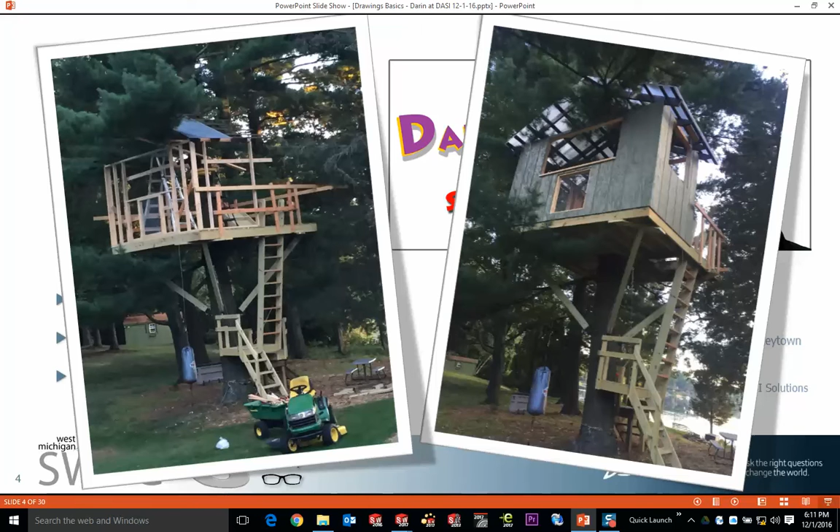I've got a lot of accolades over the years. Lately, I've been called a treehouse master. Spent the last 2 months building this thing. Now, that's a 12 by 12 treehouse. It's 15 feet in the air. It's got all the nice brackets and things that you see on the shows if you've ever watched some of those things. Enough support to put about 22,000 pounds of wood in the air if I needed to, which is way over designed.

But in my real life, everything I do starts in SolidWorks. So I've done multiple decks and remodels and garages and basements and bathrooms and a couple of things here. But this is using weldments functionality, so not what we're talking about today. But when I get a chance to vet something out, form, fit, and function is always tested in the CAD system. Doesn't matter what it is. I'll build it up real quick. I'll get the framework, if nothing else, and use the CAD system and trust it very much. So do that kind of stuff as you move forward. It's a good reason to have stick time and to be able to use the software.

So does anybody recognize these kind of things? These are napkin sketches. This is the poster child for an idea that came up when you least expect it. Now, napkin sketches are generally how we try to convey things. Anybody has not had drafting in high school, college, junior high, anywhere? You all had drafting. Did you do any drafting board work?

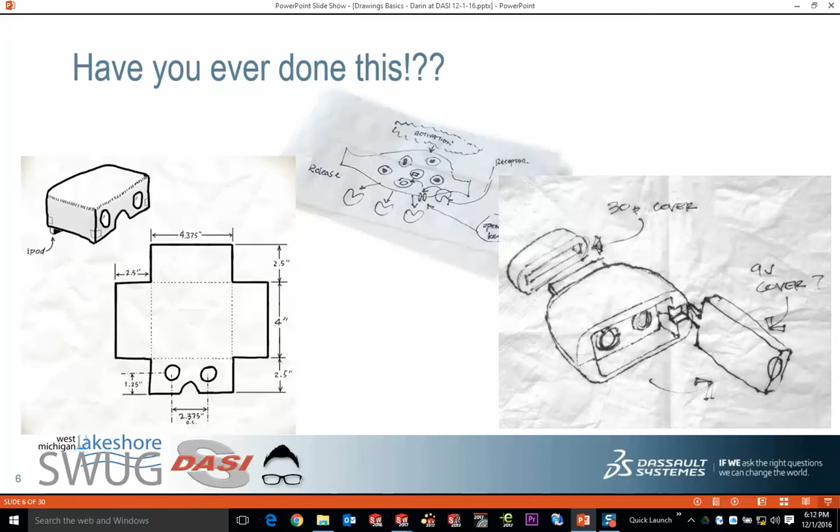College? Okay. I'm glad that they still teach you, because if you don't know the concepts, you don't know how to do these things. First of all, you won't appreciate how the updates in the CAD system work when you don't have to redraw from scratch. You still have to know the basics of how projected views work, what annotations are proper, how GD&T works, and even that's getting a little bit higher with a lot of what people do these days.

This is what we're trying to produce. That's what SolidWorks is capable of, is the wheelhouse of the software. You make your parts and assemblies, drop them onto a drawing. The drawing virtually makes itself. Now, a lot of people think that this is a lot of work. So hopefully, for those of you who are somewhat new to the software, I'll give you the basic workflow that you would use to go ahead and create drawings.

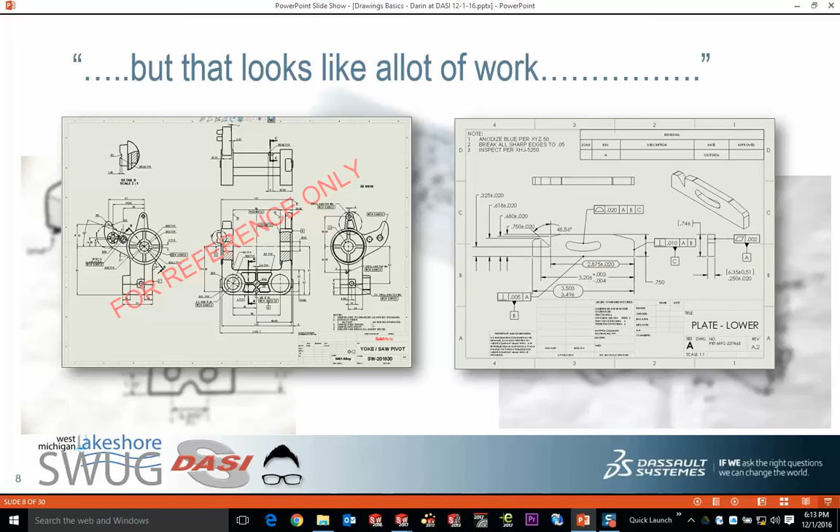And basically the stuff that no matter who you are, you should be able to create and put on your drawings. So we're going to break this up into 5 little segments here. Everything we do starts with a 3D part. So no matter what it is, the geometry is what drives your drawing.

Now, if you want to do 2D drawing or drafting in SolidWorks, sure, you could do that, but it's definitely not the tool of choice for things like that. Once your parts and assemblies are there, which we'll cover in a later step, the drawing views virtually make themselves.

Now, I always have a fear of showing presentations like this because I feel like everything I'm going to show you is something everybody knows. But honestly, when I get a chance to watch somebody present, whether it's the surfacing that Sean's doing over there with admin or up in the top there, I always learn something, no matter what it is or who's showing the product. So there's always a chance to learn something.

Once we do our drawing views, you have to annotate them. Got to have your dimensions. Sometimes we'll have GD&T depending on what level you need to communicate with the user. And then of course, assemblies and parts are both used for this. But when we talk about assemblies, now we're talking bill of materials, ballooning, those kinds of basic things. So we'll cover that a little bit as well.

And then in the end, change assimilation is a really huge part of our software. The only thing constant, frankly, about design is change. When you're making something, the only virtual certainty is that it will have a change at some point, most likely dozens. So we want to show you how the change update takes place and just give you the confidence, if you're not really adept with SolidWorks, to understand the files and how they actually talk to each other and the updates roll through. So these are the things we're going to try and hit today.

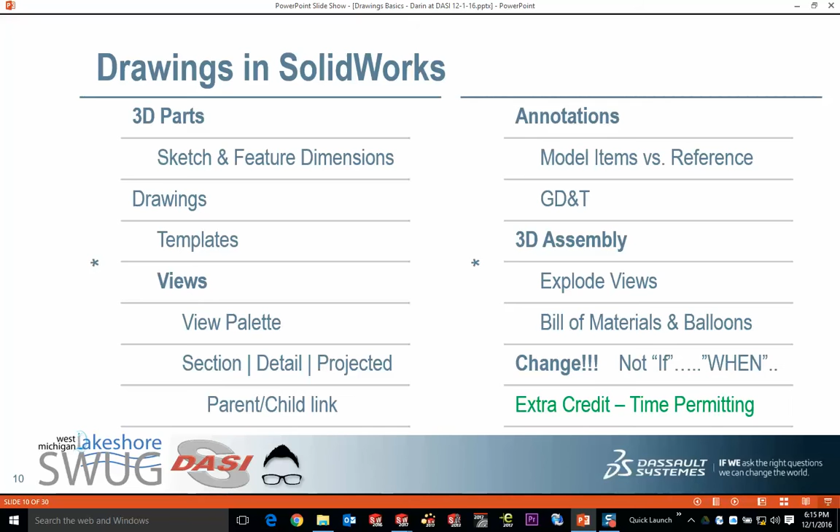So some of these will take just a couple of minutes, others we'll expound upon. And if we get to the end of this data here, I got a few other things just to fill the time, but we'll see how we are with questions and answers. But it all starts with creating the parts. So we're going to make parts. I'm not going to show you that part of it, but I will show you what we're starting with, and then we'll get right into the drawing creation stuff. So let's get started with a 3D part.

So kind of an awkward question, I guess. Anybody not made a 3D part yet? Okay, I'm glad. A couple haven't. So you'll be a little new to the software at this point, but we'll kind of go past this just a little bit as we go. But here we are in SolidWorks 2017.

Now, when you're talking about 3D parts, the basics is that you're starting files like you would in a word processor, you're opening up a document, and then you're creating geometry. And on that geometry, you're going to draw shapes. So sketches with circles, lines, arcs, polygons, whatever that might be.

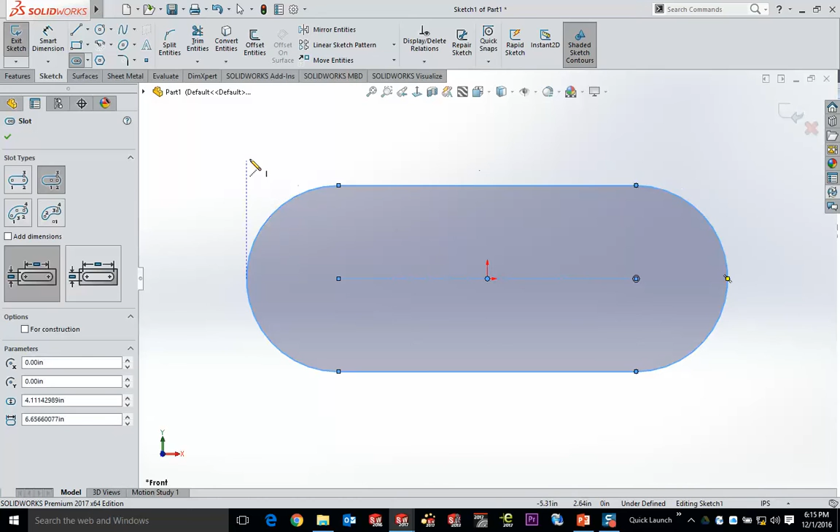When you draw these shapes, they're just basic sketches, but those sketches have dimensions. So as we go ahead and start putting dimensions on edges, whatever you type in as the value is what that's going to update to. So it's a very easy thing. But these are the dimensions that are generally drawn upon when we're making 2D drawings. So I've got a couple of sketch dimensions, we hit extrude, and bam, there you go, you've got a solid.

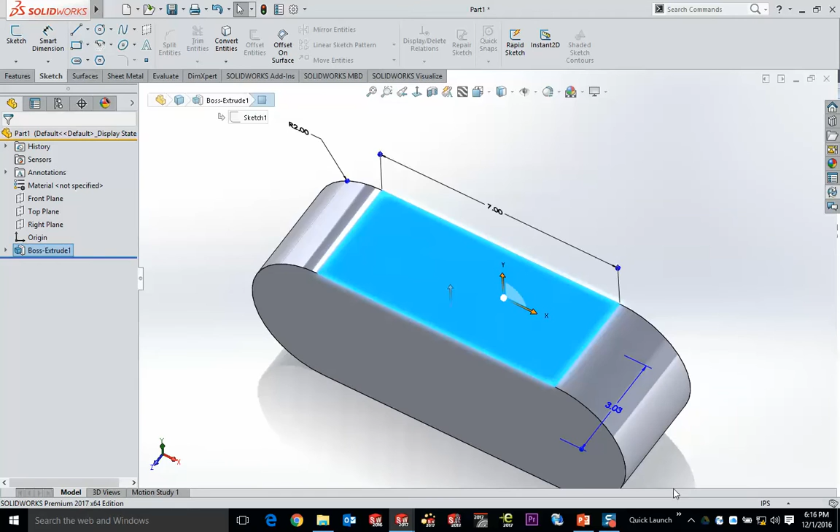Now the dimensions that are used for sketches and features, here's the 2D sketches in black. Any extrude or other feature dimensions like draft and other things are going to show up as blue. And that's really the color coding that we use at this level of things. But as you start to build, what you end up with is a bigger picture of what this part's going to look like.

Now I'm going to roll back in SolidWorks, something you might not be used to over here, but there's this tiny bar at the bottom of your feature tree. And you can roll back and step through feature by feature to see exactly how this part was built. So I can see that we had a cut, we've added some fillets to the inside of the cut, there's a little chamfer around those edges, and then a boss added to the bottom. A little shaft undercut on that, got a little revolve at the bottom that's going to give us a snap ring groove there.

And then we've got a couple of other features there to tidy this thing up. But every one of those steps has feature dimensions available to it. Now, one of the things about these dimensions is that generally, on a part like this, I could probably get away with it pretty easily. But a lot of times these dimensions aren't the types of dimensions that you'd use in a 2D drawing. They are there for feature change.

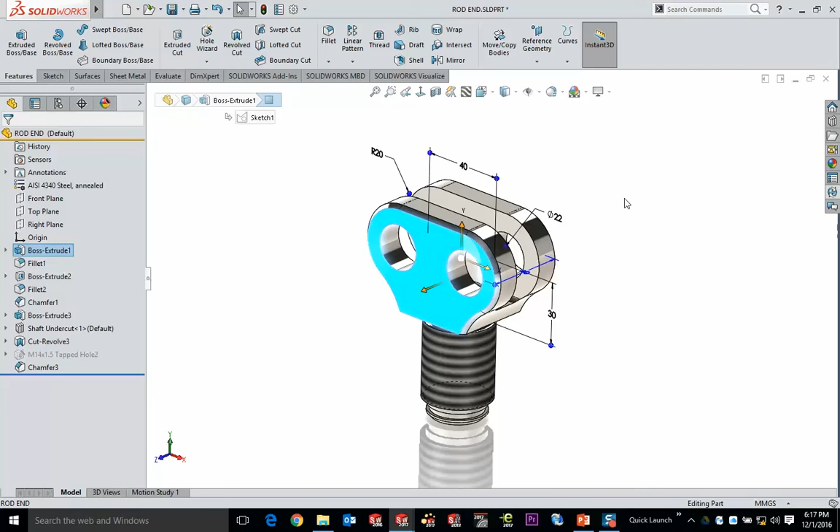They are there for predictable and controllable parametrics, which means as you change something, your design intent is going to drive how it updates. So generally, because features are built sort of on an island, they give you a bigger picture here. But when it comes down to it, what we're really talking about is individual features here and there. So one feature here is dimensioned as if nothing else exists, and then other things get added to it. And in some cases, that design intent will work, and in other cases, again, it is just to control the design intent of that feature.

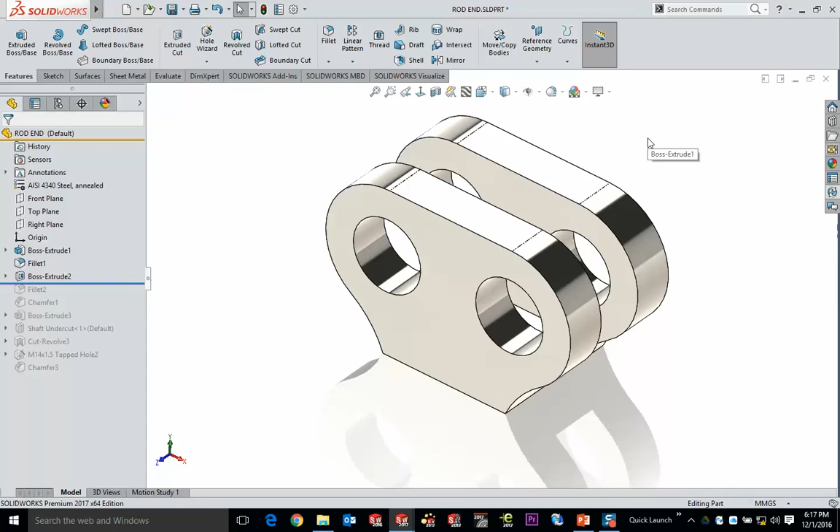So as we start with a part file here, this is really the underpinnings of making a drawing. So to do that, we're just going to make a brand new file. Now, in a Windows product here, you'd look for the little white dog-eared piece of paper. Think of Microsoft Office, Word, Excel, whatever you want to do there. But underneath this pull-down, there's two different choices here. You can either say you want a new file, which will generally choose either part, assembly, or drawing. This is just opening up a blank file regardless of how you cover that.

When you have a document open, part or assembly, when you hit that new file pull-down, you're going to also see make drawing from part or assembly. And that's really the workflow that you want to do there. What this will do is not only start a new drawing, but it will also automatically populate the view palette with the document that we see here currently.

Now, one of the things you might see here is that I've got a bunch of different tabs. These tabs are folders on your network, in my case, folders on my hard drive, but they contain drawing templates. Now, I've got a lot of different ones here. Generally, they're different sizes. Some of them I've created wide format, so C size height, but 3 to 4 times the width. Each of these is a starting point that has preset things like standards, font heights, dimensional tolerances, other things that I might not want to have to set every single time I make a new document. When you just have an initial installation of SolidWorks, you generally don't have a trove of these built up yet, so you'll just have this one tab called Templates.

Now, using this is going to give you an opportunity to use what SolidWorks provides. SolidWorks provides every ANSI and ISO size drawing template that you can imagine. So you're going to have your A, B, C, D, and E sizes for ANSI, but then you get the European sizes of A0, 1, 2, 3, and 4. Each of those is available because we're sold in 85 countries and 14 languages. So we're pretty much covering every geography out there.

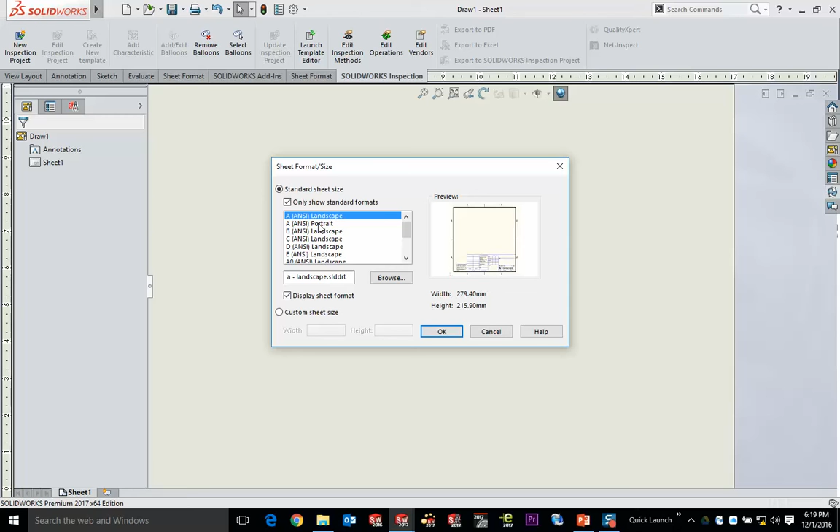When you start one of these, say we'll grab a C-size landscape. This is a generic file that you'll get from SolidWorks. It has a title block, so down here in the corner, you're going to have some details of text. There's also some preset properties down there as well. So if I click off of this for a second, what you'll notice right down there is that I've got a name that's already appeared here. There's a scale value, there's a sheet number. These are associative things that are actually going to change dynamically.

Now, keep an eye on that in just a second here, and I'm going to go ahead and start making drawing views. Whenever you start a brand new drawing, whether you're a seasoned user or a novice, this thing called the view palette is actually quite helpful. And just so we don't get all kinds of things flying around here, let me just pin that in place so all my windows sit nice and stationary. What it does is it shows you all the standard views available. Now, in the United States, generally you're going to do third angle projection, but if you're dealing with European clients or customers, first angle is something you can also set these to. You do not want to set it to first angle and then make parts here.

We've had companies that accidentally install it with an ISO installation instead of an ANSI installation, and they end up making parts that are completely mirrored of what they're supposed to be because of projection rules. So generally, if you install it in a United States computer, you're going to get a third angle projection.

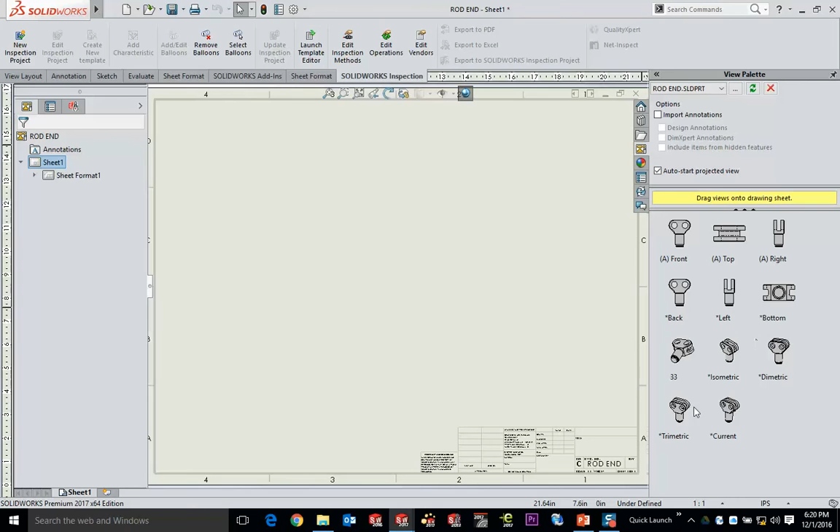One of the things I like to do, though, is make sure that this button is checked. Now, it's not necessarily checked by default on a new installation, but once you check it, it stays persistent. And it's called Auto Start Projected View. When you're given all these different views to choose from, including some other named and other positional views that are there, you really just want to grab a view and drag it out to the location you'd like it to be placed.

So with Auto Start Projected View selected, once you drop this first view in place, it's going to automatically project just based on where your cursor is. It's essentially throwing a top, right, a front, or an isometric view depending on where that cursor is. But the key here is that you just want to click where the view happens to be. So I'm going to click over to the right. I'm going to also click a bottom view here. And I'm also going to go up and to the right here for an isometric view. But I don't want the view up there clearly.

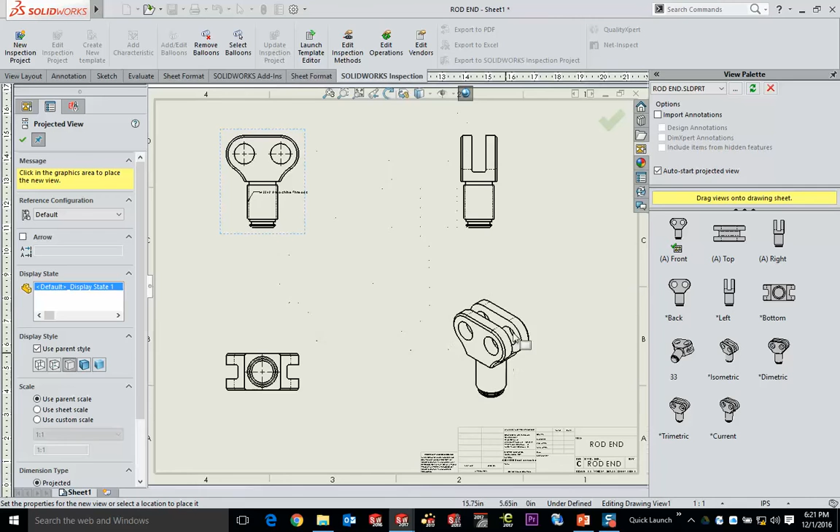So before I actually place that view, if you hold down the Control key, it actually breaks the alignment. So now I don't have to drop it, exit the tool, and drag that view over into a position. It's pre-selection or pre-dropping. So just hold down Control and click it where you want it. And then everything is going to have either static projection or be broken projection with that Control key held. So that'll be your first little tip there.

What basically happens with this, though, is it lays out all of those standard views. Now, when you take a look at the view palette now, it will show you views on the view palette that already get used on the drawing. So you see the front and the right and the bottom and the ISO views have these icons next to them, indicating there's already a drawing view out there of that position. In years past, we used to eliminate those from the view palette, but if somebody wanted a second front view, it wasn't quite good for workflow. So we leave it there and just indicate that it's on the screen.

But what's happened here is we've also got a parent-child relationship created by the way I projected these. I placed this view first, which if we move it around, it's going to keep the projection of all the other views that are there. But this view is also the parent to these other views, not just positionally, but also display style-wise.

So if I take this view and select it, and we're selecting inside the view, which is this border, but not on the part. Got to be very clear where you're picking because whatever you select is what you're actioning on. So if I select inside this view but not on the part, I can switch it over to, say, hidden lines visible, which you now see every single view do. Or if I switch that view over to shaded, you'll see all of the child views falling in line with this display style.

So I generally start my drawings with hidden lines removed, just the best, most common way that I'm going to display these. And then when I need to, maybe I'll take this top view here or this right view and make that one hidden lines shown, or the isometric view, again inside the view but not on the part, we'll show that one as shaded. So this is all pretty typical stuff.

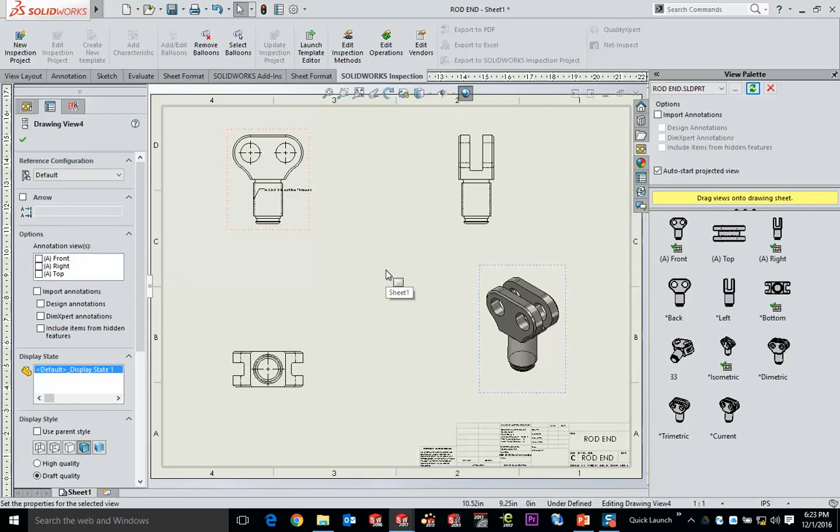Now when you're moving these views around, you'll notice that these views keep their projection. You can break the alignment, although I'd never recommend doing that, at least in most cases for the standard. But if you like the distance that these views are from each other and you still want to move them, holding down the Shift key in this case actually moves them, but it keeps the current spacing that you have.

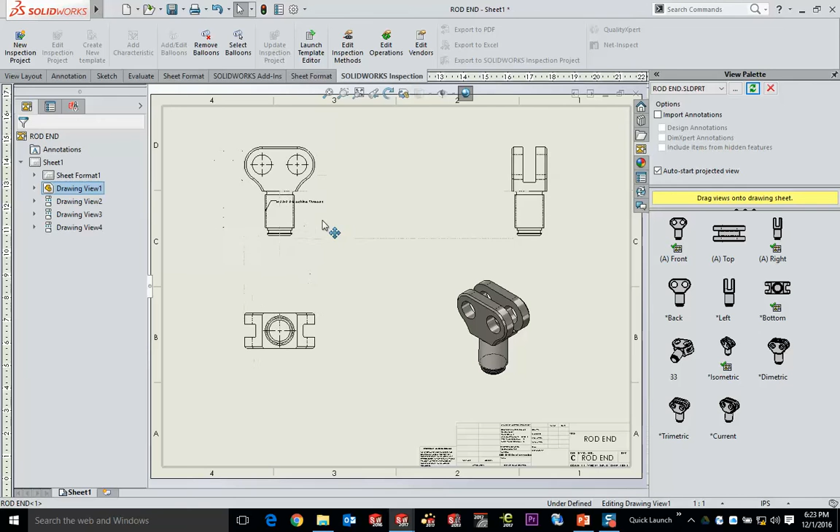So if your drawings are sitting in a really nice position and you like to keep them there, holding Shift while you drag a view around will make them all keep that location. That's another little tip. So basically that's it—you're just laying out the drawing and placing the views as necessary for our particular purposes.

Now the template itself also did some other magical things. If you notice the title block down here, we've got some other data that's now showing. What you see is this value called rod end. We've got an AISI 4340 steel annealed. These are properties, and they're part of the part file itself.

If I go back to the part file, this is one of the part properties placed either through a data management system or simply through File and down to Properties. Properties are important because if I set them here, I can use them for a lot of things—I can fill out title blocks and bills of materials. We can search based on these, and they will also auto-populate data cards in a PDM system.

When we get into these different values—whether it's a description value or configuration specific, here we see rod end—if I switch that over in the part file and call it rod end demo, for example, associativity kicks in. We go back to the 2D drawing and you'll notice that value has automatically changed. If you have to manually type something in, that's something you have to keep track of yourself. This is what we call an associative value—whenever I change it in one spot, it automatically trickles down and updates wherever necessary.

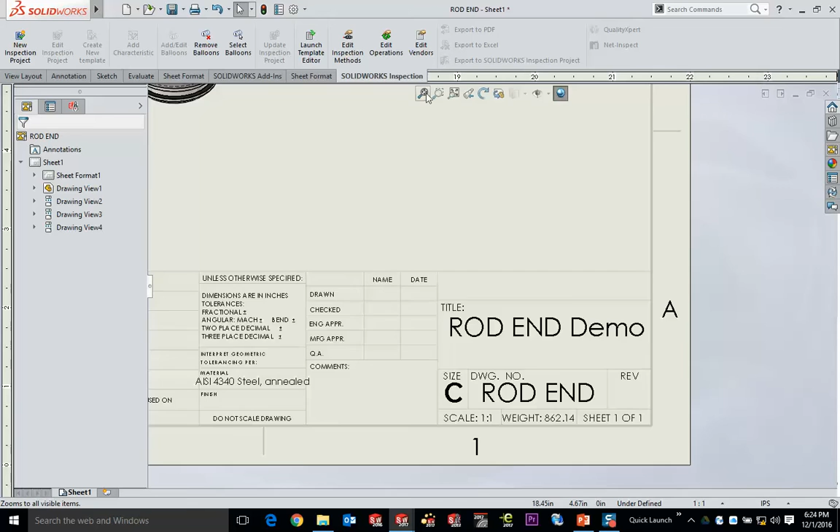So this is one of the extra credit things we'll do at the end if we get the time. But I want to make sure you know how to set up some of those properties in the end, no matter what we do.

So when we look at what we're dealing with, the 3D part drives all this information—it's the parent for the drawing. If you send the drawing to somebody, you need to send the part and/or assemblies too. This is a very basic thing a lot of novice users miss—you'll send somebody an assembly or a drawing and they'll try to open it and have no choice but to open it read-only. Our files are dependent: part files are the main files, and assemblies and drawings depend on them. Make sure you send all of them whenever a file is transported from one person to another.

Sketch and feature dimensions can be used in this circumstance, and I want to show you that when we do the annotations. There's also something called named views. Now, named views is something I'm going to bounce back and show you real quick. When you look at the views we laid out here, these are standard projected views—they always start from the front and are just orthogonal projections.

But if you're back in the part file or assembly file and you find a really strategic view, maybe for conveying some sort of information, you can simply orient that view and then hit your space bar. That brings up a tool called the view orientation box. This allows you to update views to different orientations, but also save new views.

So if I like this view, I'll go ahead and call this a named view. We'll wait for that to pop up here and call it 'cool view.' Sorry, my screen capture is slowing me down a little bit here. Maybe—we'll see. All right, we'll come back to that in a second.

Properties, though, drive these fields in the drawing—that's something I like to show. Now, who currently uses properties? Anybody pulling that off? Who would like to use properties in their drawings? This is something I feel is a necessary thing. We'll try to drive it forward so we can get to that particular point.

The views themselves, though, are very simple—we drag those out, we lay them out. I'll show you the named view here in just a second. But the main thing is that the drawing takes care of itself.

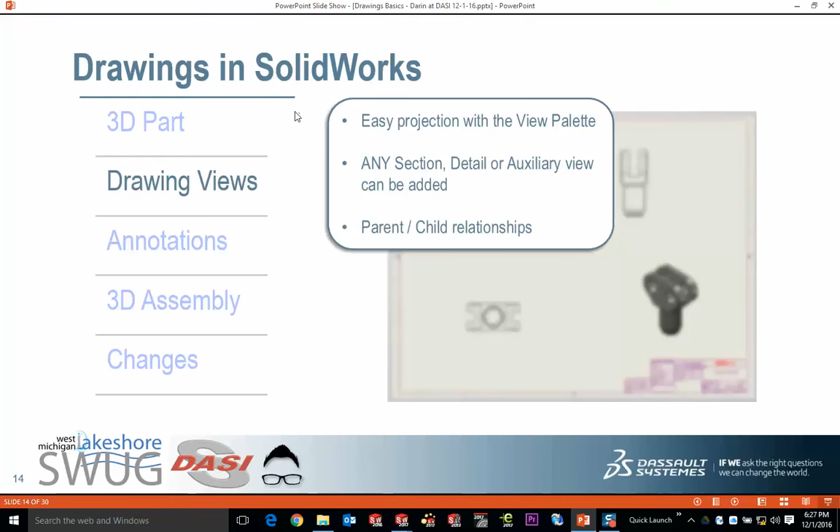Parts assemblies are going to be the shape that we place on each of those, and then they all have relationships. But mainly, this is the point that you want to get to.

Now, on this drawing, I've got a few other views which I'm going to lay out for you as well. The section view down here in the bottom is absolutely essential, and then detailed views are probably the two most essential ones. There's auxiliary views, projected views, and other things like that. But essentially, where we're sitting right now, we're basically looking at the main underpinnings of what a drawing needs to be.

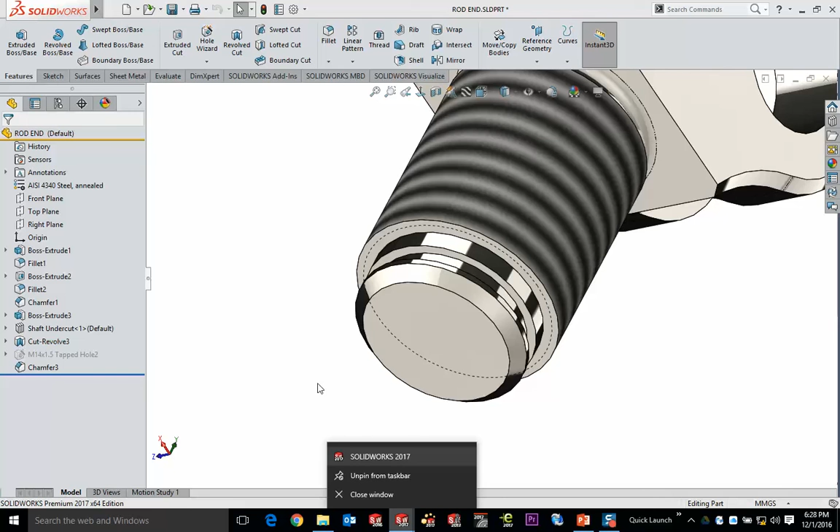All right, so I'm getting a little bit of an issue here. Give me one second, let's see what we got. Ah, that's fine. All right, maybe not. All right, give me two seconds. I'm going to kill this one and we will come back to it. Oh, the one thing I hate doing is I loaded up that thing over there for the projector they've got, and I never like to do those things right ahead of a presentation because it messes with your resolutions. All right, we'll come right back to that.

So when we're putting in our 2D drawing views, the names of the views that are on the file there are also a fairly important type of thing. So what you're going to see on the drawing I've got up here right now are just the basic views that we started out with. However, when you save a part with those named views, you can draw upon those.

So over here we have the one that I've saved at an odd angle. It's just an orientation that maybe was advantageous, but wasn't a specific projection off of any of the other edges that happen to be here.

When it comes to creating additional views here, projected views are one of the most common that you're going to run into. Now, you can use edges in a view to create those projections. You can go ahead and draw lines to create any of those projections, or you can simply use some of the common projection tools you have in your View Layout tab.

Now, a couple different ways to do this would be to choose a section or a detailed type of view. When you grab the section view, this is going to walk you through a bit of a wizard. Over on the left-hand side here, we've got different ways of positioning a section line. Now, when I'm in the graphics area, you can see right now I have one that's got an angle to it, and this is an aligned section.

If I switch this over to vertical, you'll be able to see the vertical line, and it's wherever your view is closest to when it comes to your cursor. However, when you're out there, you can also switch those values just by hitting the tab key. So by tabbing through each of those, you'll see an aligned section, you'll see a vertical, then you'll go ahead and see it switch over to — we don't want to start that one — we'll go ahead and see this one switch over to a horizontal.

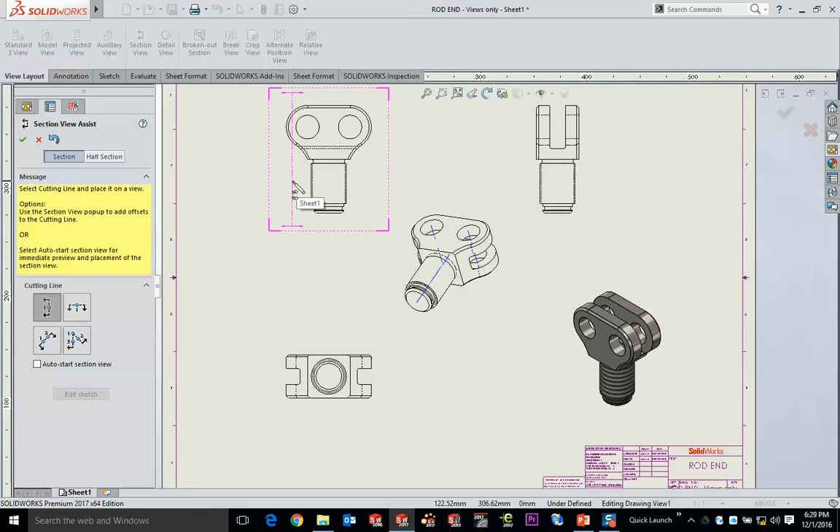But these are going to be full sections. It's whatever view you're closest to, though, that's going to be generated. Now, when you get close to the view, you can snap to circular geometry just by hovering over the edge of the circle. You don't have to find that center point — just go ahead and hover over the center of it, the circle of it, and it will snap to the center of any hole you want to cut through.

Now, once we go ahead and select that, this is another little extra credit thing we'll do if we've got some time here, but these are the ways to make notches. Notches are something where, say you had a plate with a bunch of holes, you might want to cut here, jump down, cut a hole, jump up here, cut through another hole. Sorry about the hand puppets, but basically you're trying to zigzag through a series of holes that might not fall in line with each other. Now you can do these on round parts with arcs, you can do simple notches, or you can just zigzag through it pretty much just through selections.

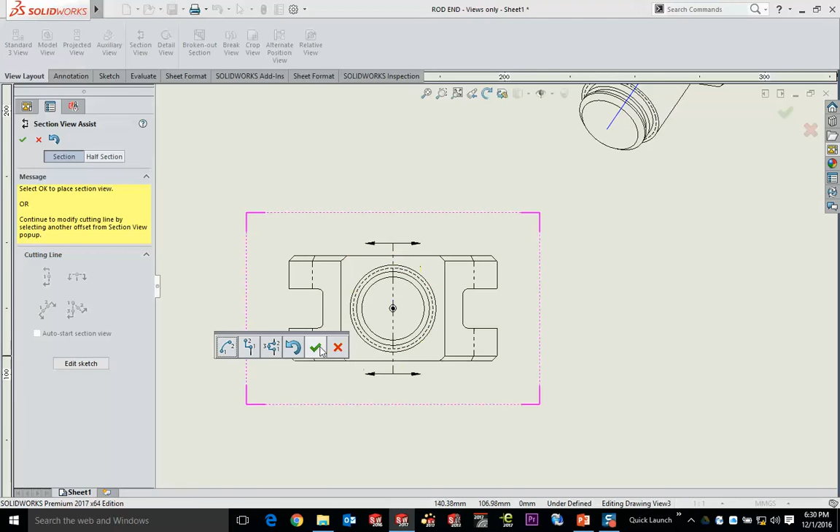When you just want to do a single center line, we'll go ahead and say OK to that, and that will generate our section immediately. Now the section itself gets generated based on a couple of different things.

The section cut itself will give you the geometry and capping of where the material is, but you'll also see a crosshatch that's physically based on the material you've chosen for your part. The material has a hatch, a color, some RealView graphics attached to it, and a mass property. All of these are important when testing the weight of a part and doing simulation. Here on the drawing, it will give you the proper hatching immediately.

I'm a big fan of taking views like section views and turning them into shaded views. It really resolves a lot of ambiguity, especially when cutting through an assembly. When you've got a lot of parts of the same material, the crosshatches match up and everything melds together, making it very difficult to see. So sectioning through any part or assembly with shading is a much easier way to deal with things.

For tiny detail that you need to clear up or show, detail views are the best way to do that. By default, they expand the size of whatever view you draw them on by 2, but you can expand that to whatever you want. That's just the default installation value.

This puts you into a circle sketch tool, but feel free to sketch any shape that bounds a region—a rectangle, a spline, a kidney shape, whatever. A circle is our default, but any shape really works. If we want to make a bigger view of this snap ring cutout, I'm just going to draw a circle in an area around there.

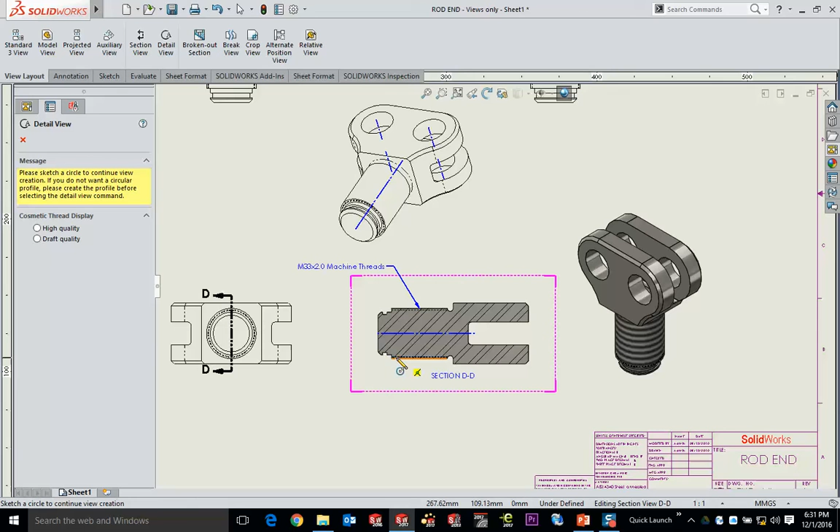What I like to do is make sure the center point of this circle snaps onto something. The reason isn't so the circle moves if the drawing view gets moved, but if this part gets longer—say this shaft goes from 40 to 60—wherever I've snapped the center of this circle is where that circle stays. So if the shaft moves over two inches, this moves over with it. It's a simple thing to do; I don't have to be very specific. There are a lot of midpoints and endpoints there—just grab one that's good and draw a circle that bounds a region.

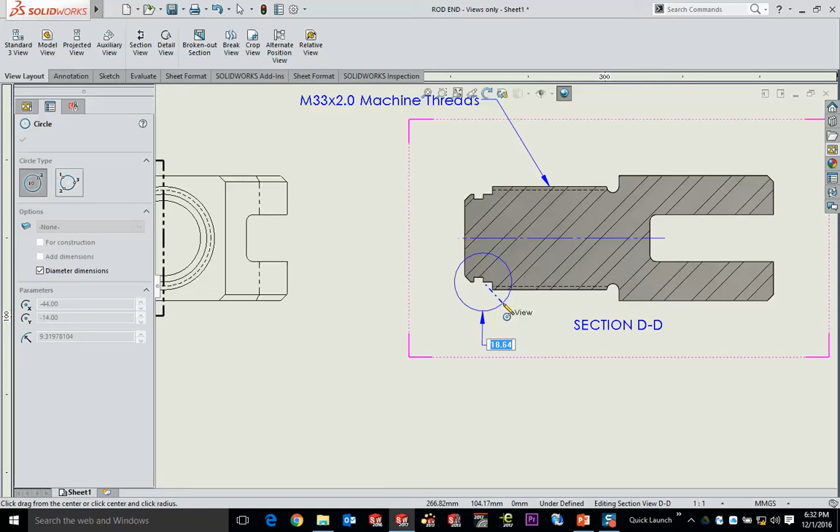Once we do that, you'll notice the detail view will be twice the size and attached to your cursor. Just select anywhere in the background and that will create the detail view of that size.

Associativity is what we're striving for with everything here. When you do something manually, you almost have to assume everything is manual, and therefore it has to be checked if a change is made. But when things are associative, you don't have to make sure the change is made in many places—you make it in one spot and it rolls through the rest of the part.

A simple example is this detailed circle. If I pick and drag it to make it larger, you see that view keeps its associativity—it's going to get bigger. Go ahead and grab that and drag it to a better spot to make it a much more visually appealing type of thing.

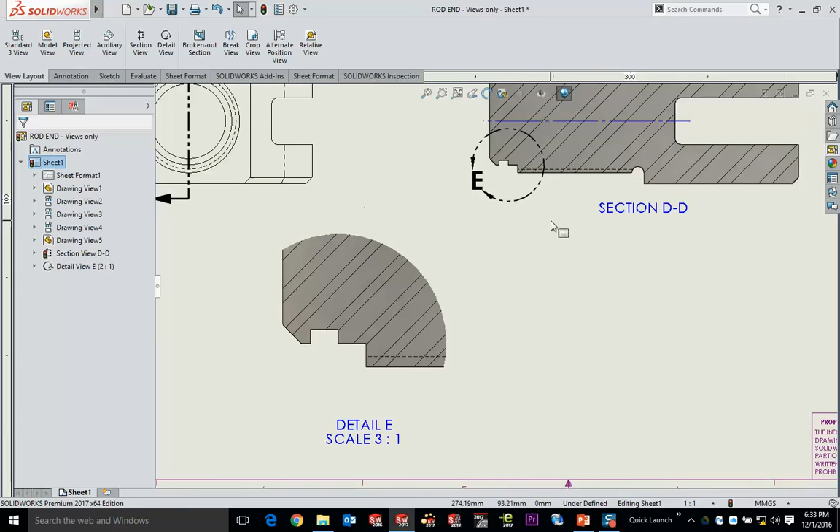You can click on the scale value down here in the note and change some of this stuff, or even go into the view itself and change it in the property manager—all of these values are fully associative. So if I want to make this thing even larger, we'll call it user modified, and call this one 3 to 1 or 4 to 1. It doesn't really matter how you take care of that. The associativity rolls through with the size of the view, the note underneath it—everything cascades right through the drawing. That's a pretty important part of getting these updates to happen properly.

Didn't really want that view, so we'll go ahead and get rid of that one. Okay, looks a little bit nicer in that respect.

One other thing I'd like to show here is a little bit about updating. Now, many of you have probably tried this, but if you've never made a 2D drawing out of this yet, you might not be aware of this functionality. I'm going to take this side view here just for effect, and we'll go ahead and show that one as hidden lines removed or hidden lines visible. And you'll see even in the section view here, this kind of a change that's going to take place.

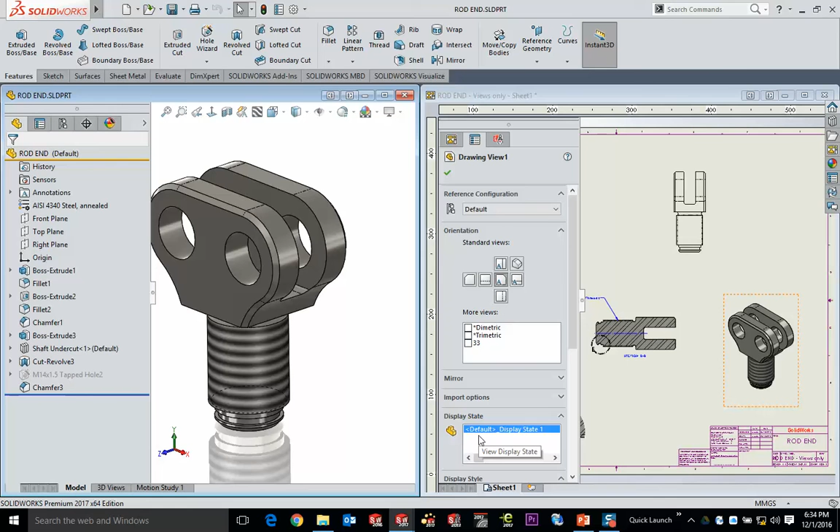Now, I'm going to tile my windows for a second. I'm going to tile them by having my part file open at the same time, and then just being able to see both windows side by side. This isn't anything specific to drawings, it's just a Windows functionality, but you'll find this under the Window pull-down menu at the top, and there's tile horizontally and vertically. Now, I like to use this a ton, so I've placed a hotkey on there of just the H and the V button. All I have to do is just tap on V or tap on H, and I can go ahead and tile as many windows as I have maximized simultaneously. So it's a pretty pleasant way to deal with that.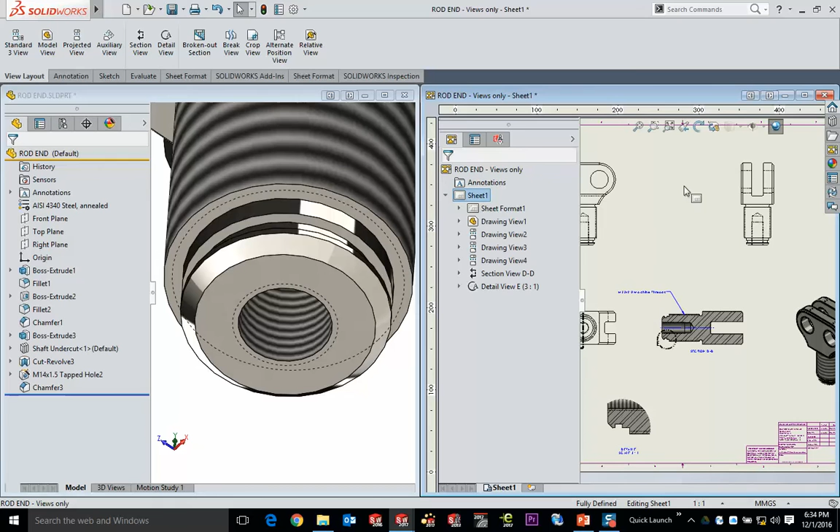What I want to show you though here is the associativity. You go back to your part file and you realize that you've missed something. Go ahead and modify it, make a change, doesn't matter what it is. Here I've got a tapped hole that I would generate if I had more time from scratch, but I'm just going to unsuppress it. And what you're going to notice is that in the bottom of this part where we no longer have a tap, we're going to see that tap show up, but then over on the 2D drawing, it just happens there automatically. So changes made to the part will roll through to the drawing and the assembly immediately.

If I go ahead and take this part file here and I want to change its length for whatever reason, I can do that in the part file, and what will happen is the drawing will dynamically update. There's no worry about that. And that is one of the reasons why the part is so important to the drawing and the assemblies, is because the part is the main part of this file.

Now, to expound upon that even more, when you're dealing with a part versus an assembly or a drawing, the file sizes will kind of back up what I'm saying. If you look at a part like this, let's just call this a 300K file. The drawing might only be about 50K in size, and that's because it contains the display data, the dimensions, bills of materials. But other than that, it's looking at the part file for the rest of its definition. It's just the graphics that it's really holding inside. So those are the kind of things that you're going to see from changing parts to changing the drawing itself.

Now, the main thing, like I mentioned, that we want to get to are these things here, the annotations. And this is where you have to make some decisions. When you build the part, the general decision is: are the dimensions that I've used to build the part the ones I would also use to manufacture it? And again, on a small part like this, I might be able to get away with something like that. But on a larger part, generally what's going to happen is the dimensions are going to stack up in such a way that they won't make sense. So at this point, I've got two choices, and I'm going to use both of these choices. One is to bring the dimensions in from the part itself.

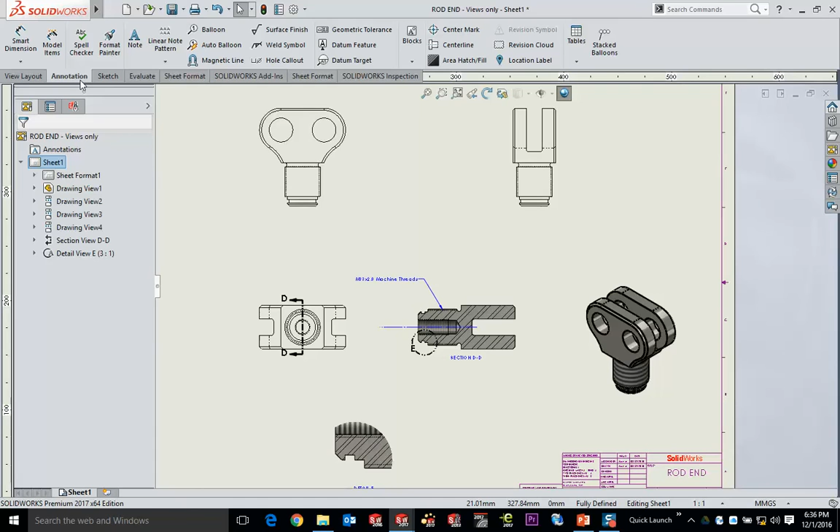Now, this is found under the tab called Annotation. And the main thing we're going to talk about here is something called model items. The reason we call it model items is because these are things that we're bringing in from the 3D part or assembly and populating the 2D drawing appropriately. So for example here, dimensions is really the poster child for this kind of a thing. We say what we want. Do we want to specifically select a view? Do you want to select on the part and select a feature? Or in my case, I'm going to bring in all of the dimensions for the entire model.

Now, it isn't just dimensions that we can pull in. You can pull in things like, this happens to be hole pattern numbers, so the quantities and spacings are going to show up there. Down here we have surface finish marks, GD&T datums, caterpillars for weldments. All these little details you can place in your 3D part files and have them automatically populate your 2D drawing.

So if I wanted to throw a datum on a face in 3D and I want to throw a surface finish mark on there, it'll put it in the right spot on the 2D drawing. Now, the other thing that I do on this one, and we're just going to stick with dimensions in this particular case, but as I go to the bottom here, there's a magic checkbox, and this thing says use dimension placement in Sketch. Turn that off.

When you use dimension placement in Sketch, think of the sketch that you've drawn in the 3D part, and where you clicked the dimensions, where you place them is exactly where it will place them on the drawing. So I guess if you're a little bit OCD like me and you place them nicely everywhere because it drives you insane if you don't, then you'll be okay. But if you just placed all your dimensions and kind of quickly gone through there, turning this off is going to make auto placement happen here, not the exact placement that you placed them on the 3D file.

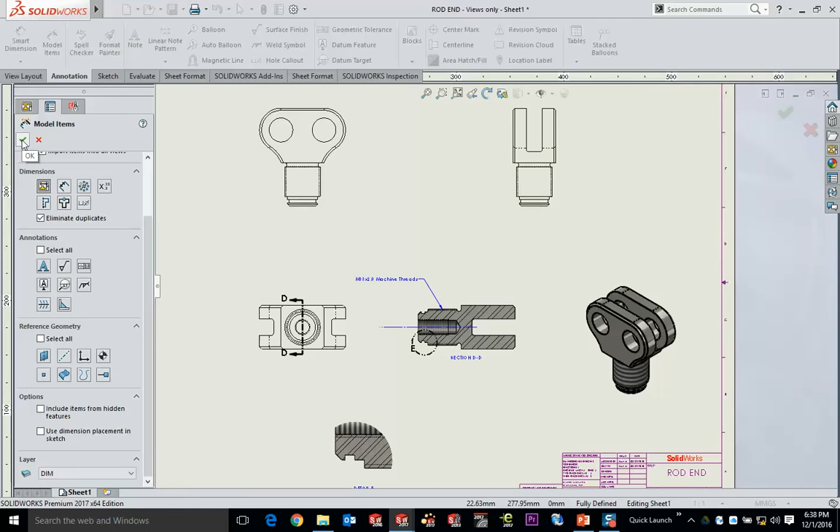So when I say OK to this, it will start at the detail view, go to the section view, and then start rolling out to the main views and start adding details. So we'll say OK to that, and then we'll sit back and watch that happen. So when you've got a section view there, generally the idea is that because the section exists, you're conveying to the software that you want to show a lot more detail in that area. And that's why it focuses dimensions on that particular view.

Now, if you don't care for that, getting the primary dimensions, a couple of ways we can deal with this is first, not having that view up there when I do the primary import of dimensions. It will go with the views that exist currently. But what you can also do very easily is grab dimensions, either one at a time or through window selections. And I like to go ahead and window select a couple different ways. Left to right versus right to left will be a crossing window versus an inside window. And you can move or copy these dimensions from one view to another.

So if I've got dimensions on my section and I'd really like them up there on the front view, moving them is the Shift button. By holding Shift, I can go ahead and grab these dimensions, drag them from one view to another. You'll notice my little no smoking symbol there turns into an OK symbol when I'm inside the drawing view. If I go ahead and drop them there, they will auto-populate onto this view.

Now again, these are dimensions that I brought in from the part file. So these are associative values. I can double click and change these just like a sketch dimension or a feature dimension, and it will change everything here and everything in the 3D file as well. A couple of other things that happen with this is that Shift is a move.

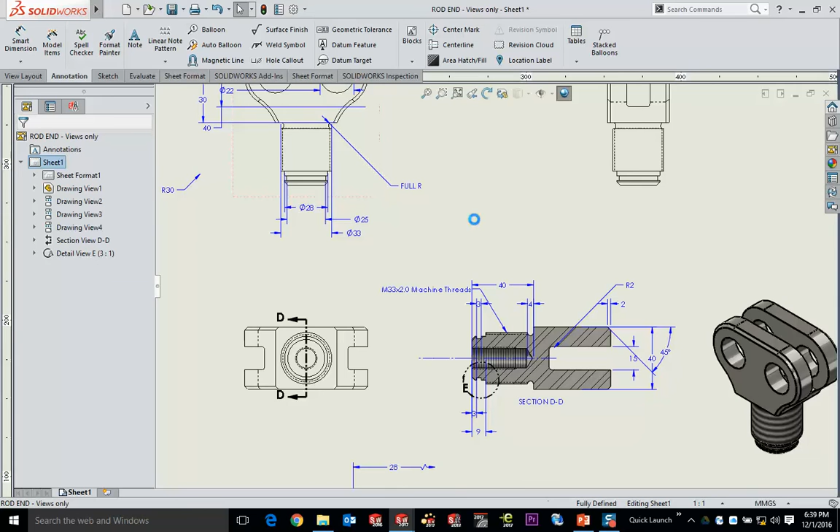Now, if you want to go ahead and have dimensions that are associative and double-click changeable in multiple views, then what you're going to do is use a Control key instead, Control being a Windows universal copy. So if I got a dimension over here that I'd also like to have in this side view, I might hold down my Control key and pick and drag that dimension over. And again, Control is a copy. 28 is still over here, and 28 is also over here, both of those associative editable dimensions.

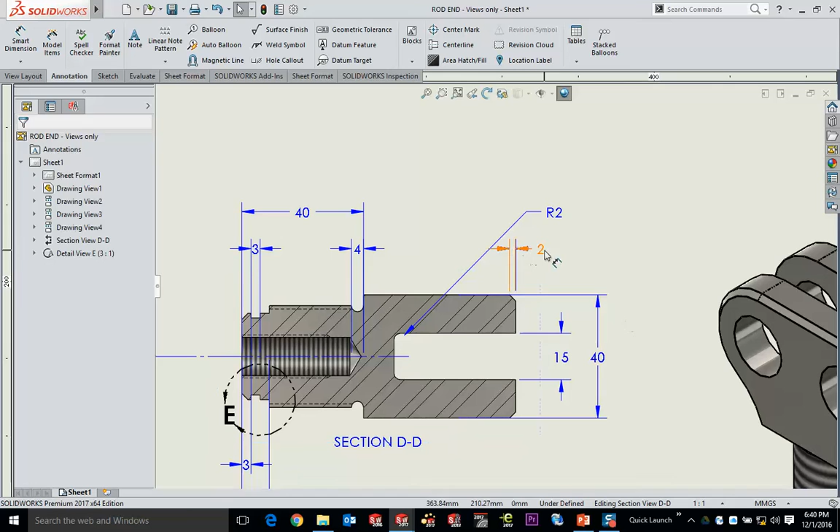Now, this looks like I'm making a bit of a mess of this, right? These dimensions are in place and they're kind of stacked on each other. Some of them I don't need. This 2 millimeter, this 45 degree, those are the dimensions that come through for a chamfer. It's not the best dimension ever. What you might notice is that if you go up to your annotation tools, and I don't have it up here by default, but typically I would have it up there, is there's an actual command for a chamfer dimension. There's a physical specific command for this.

So instead of having a dimension of a length and an angle as two separate dimensions, a chamfer dimension allows you to actually pick on that edge, and what that will do is allow you to then put in a combined dimension. Now this is a dimension I have just added, which means if I double click it, the only thing I can do to it is change its properties. These other dimensions here, however, are quite different from that.

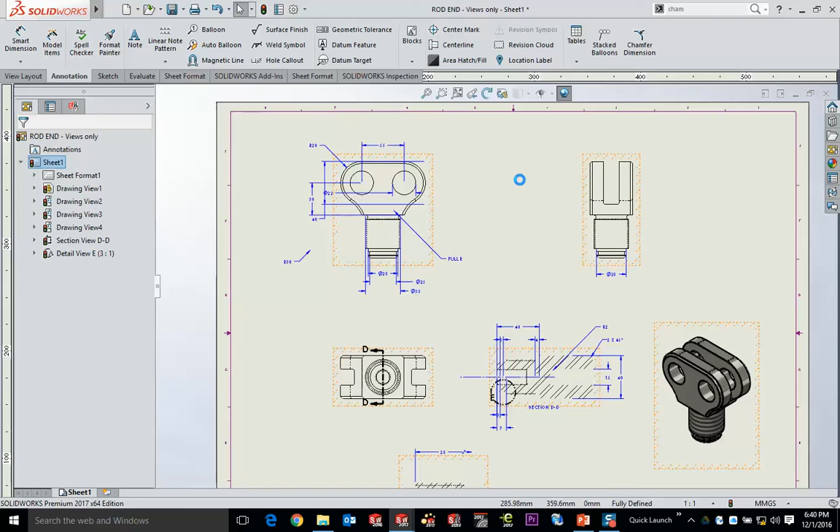If I want to go ahead and take this dimension here, for example, and double click it, now I can change that to anything I want. And when I rebuild it, you'll see that my entire drawing updates as a result of that. Okay, so the ones you bring in from the model are changeable dimensions associative to the part. Ones that I've added to the part, however, are not driving dimensions, but they will react to the model change. Now we'll talk about that in just a second.

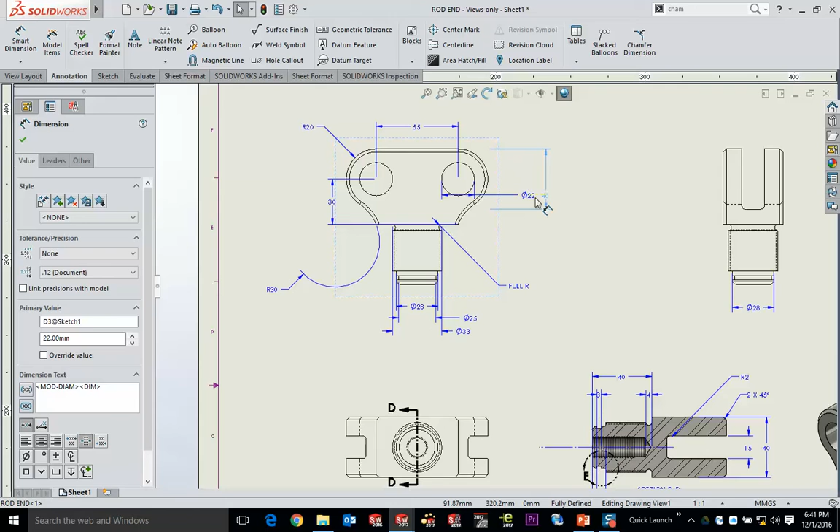But one of the things that I see a lot from a novice user is trouble laying dimensions out, putting them where they really matter, or just in a place that really just looks pleasant to the layout. So I'm going to throw a bunch of dimensions over here on the side and just kind of screw this up a little bit in an effort to really make a bit of a mess with a typical type of dimensioning layout that you might end up seeing.

So let me just move a few other dimensions around. We'll start to get these a little bit screwed up. That looks pretty good. This is probably something that you're more used to seeing when you're starting off a project. I've got a lot of lines, they're kind of ugly, things just don't look quite right. So a couple of things that we can do with this: first of all, just drag dimensions around and you'll be able to change things like the position of that dimension. So dimension to the inside, arrow to the inside, really depends on just what your standards are set up for. But a couple of little drags will allow you to make some changes.

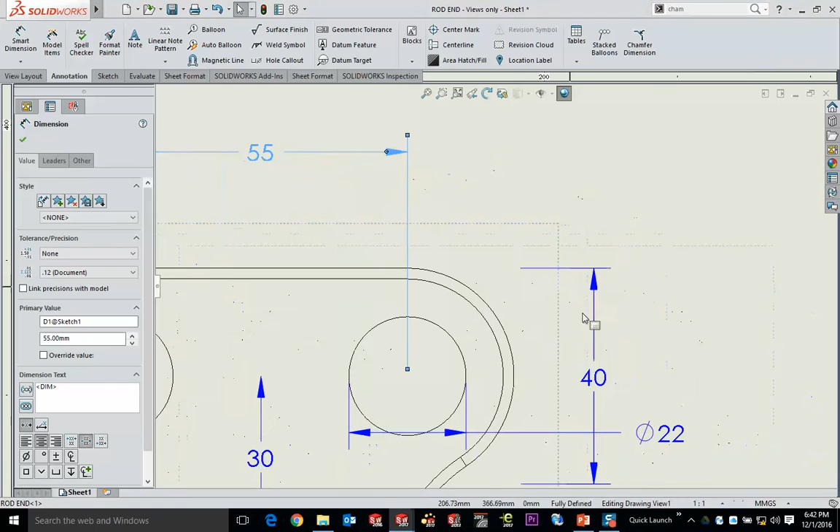Clicking on the handles that show up on any arrow will enable you to go ahead and switch the directions of those arrows. And that works for everything. Anything that's a linear dimension, when you pick on it, you're going to see handles on the arrows that will allow you to quickly move those arrows around. If a dimension is between the leaders, it will auto center by default. That can be turned off. But if it's outside the leaders, generally you're going to get a linear dimension, or if it's a vertical dimension like this, you'll get a dimension break. And those two with handles are modifiable.

Now again, generally what happens is you'll get dimensions that are sort of a mess and on top of each other. And there's a bit of magic to this that not every SolidWorks user is aware of. Whenever you select dimensions, there's this thing that pops up here next to your cursor. You see this little box? Does everybody pretty much ignore that? Or do you guys use it? Who does use it? Okay, I'm gonna ask that question again next user group and we'll see if that's changed. This box will pop up. Hover over it. All kinds of magical things pop up.

Now, a couple of the magical things that I use quite often, I'll show you on single dimensions. But here is a group of dimensions. The bottom row has a button here. And the button itself is called Auto Arrange. By picking 3 dimensions and clicking Auto Arrange, it automatically puts them in a place where they're going to look good. It will automatically space and orient each one of those dimensions.

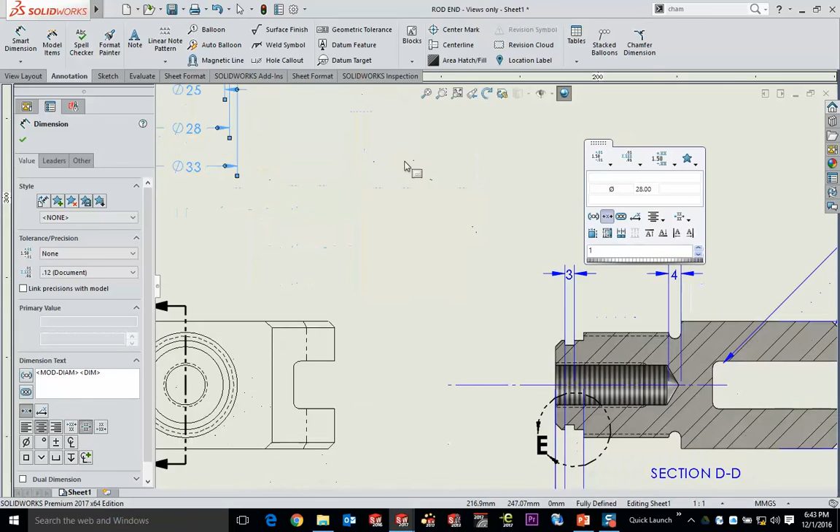I can go ahead and take any part that I want, any view that I want, and I'm going to drop all kinds of dimensions all over top of each other. And just by window selecting all of those dimensions, clicking on this box and hitting Auto Arrange, it's going to automatically make my drawing view look beautiful. Scary, isn't it? It's quite scary. This value is something that's set in this drawing document, this template.

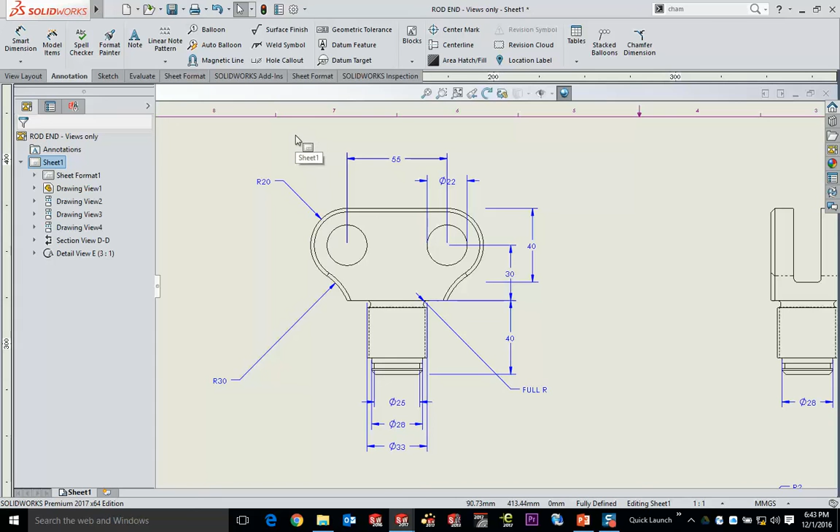Now, a lot of the values of the settings that we have for these kinds of things are set in the properties. Generally, you'd find those under the Tools pull-down menu, and way down to the bottom of this, depending on the resolution you're running your computer, is where we get to options. It's a little gear icon. But the gear icon also lives right here at the top of your interface as well, so use that one instead. When we click on that button, what you now have here are system options and then document properties.

Now this again is kind of 101 with some of our classes, but document properties are the values that live with this file. So if I save it and send it to somebody, everything that's set in this tab will also go along with it. That's going to be things like the standard that we're adhering to with this.

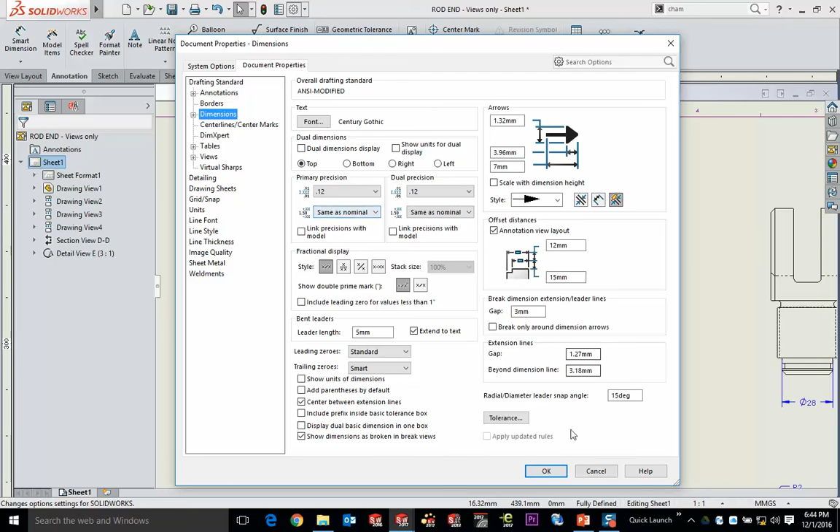But also anything that I want to go ahead and modify that has to do with fonts and placement and other things like that. Now here in my options, when I click on dimensions, you're going to see this area right here called offset distances. This auto placement says 15 millimeters off the part, and then each dimension has a 12 millimeter spacing between them. That is the value specifically that you're seeing right down here. Distance off the part versus subsequent spacing.

So you can set that to be something pleasant. Basically window select any of your drawings with all those views and just hit auto arrange and everything will move to those types of positions. Now in some cases, again, you want to clean that up a touch and move things around. But drawing view cleanup should all be just basic drag and drop functionality, depending on how you're trying to clean things up.

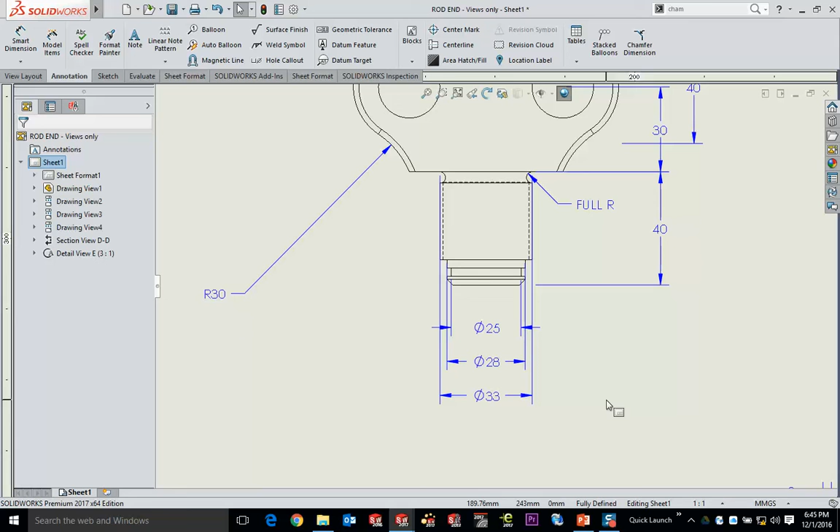One other thing that you can do with this, and I'm going to select multiple dimensions once again, is when this tool pops up, there's also a thumb wheel here at the bottom of it. And that thumb wheel actually enables me to modify the spacing that we have with each of those. For some reason, I only got one on that one. Let's do that one more time. Yeah, the other ones are going to be spaced right off the part, so they're going to be rigid on that one.

But when you grab those kind of things, you'll have other values that are going to then clearly auto space. Now this is a ratio. It's going to take those initial values and expand them up to 2 times or 3 times or 4 times those gaps. But it's another way to make some changes relative to those.

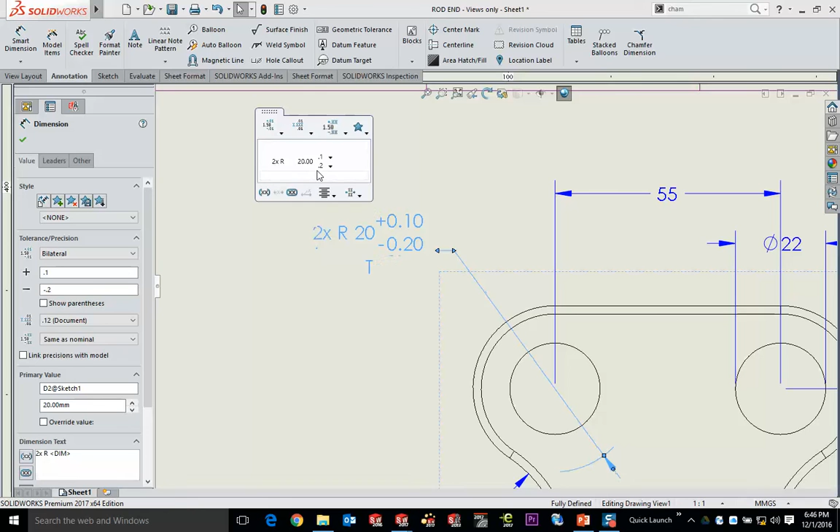The other thing that I absolutely love about that little tool, say you go ahead and pick on a dimension, for example. When you pop this up, this is a very quick way for us to apply things like a tolerance. Say I want to put a bilateral tolerance on it. Maybe change those values, all in this heads up toolbar here. And go ahead and type the word radius or 2x. All of this stuff can be done right here without having to go into the properties of this dimension.

Now that said, this dimension is also one that came from the part file itself, just like this one right up here. And if we look at these side by side, you'll notice that my 55 dimension on the top is identical over here in the drawing. When you bring in the dimensions from the model, any of these changes that we make at the drawing level are also going to be bidirectional.

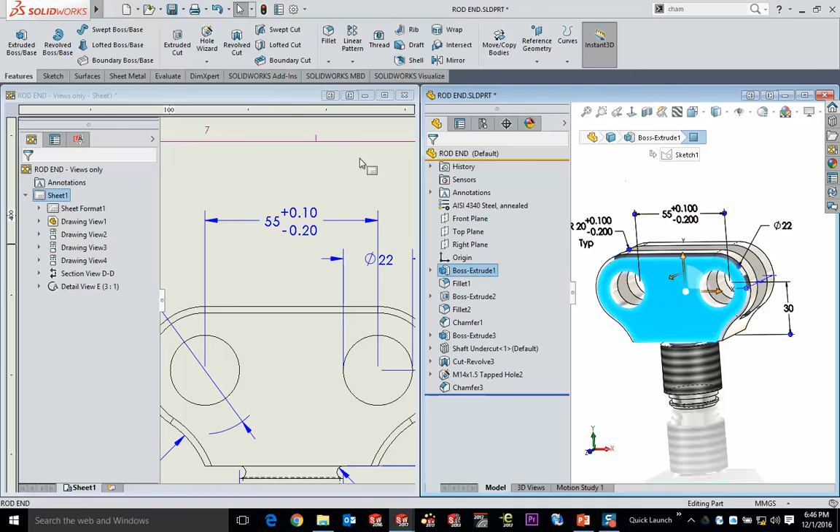So if I go ahead and, once again, do a bilateral tolerance and just do a little plus and minus on this. That looks pretty good. So now in my drawing, what we have is 55 plus 0.1 minus 0.2. When I click back over into my part window, you'll see that that's there as well. Okay? So all of these changes when you bring in these dimensions are fully associative from one view to the other.

Now when it comes down to it, not all dimensions that are used to model the part are the ones that we end up using here at the 2D drawing. Basically what happens in these types of cases is that you want to supplement with additional dimensions. So for example, on something like this, I'm going to bring in some center lines. So I'm just going to right click inside this view, go to annotations, and bring in some center lines.

Now we can do these automatically. Auto insert, select the view, they'll put them in where any cylinder happens to be. But you can also insert center lines just by picking a couple of lines. Say if I pick right there, it does it automatically on the center as well. Can't quite get the ones I want to do over there. But by picking 2 lines ahead of time and picking center line, it will bisect those and put a center line right in the middle.

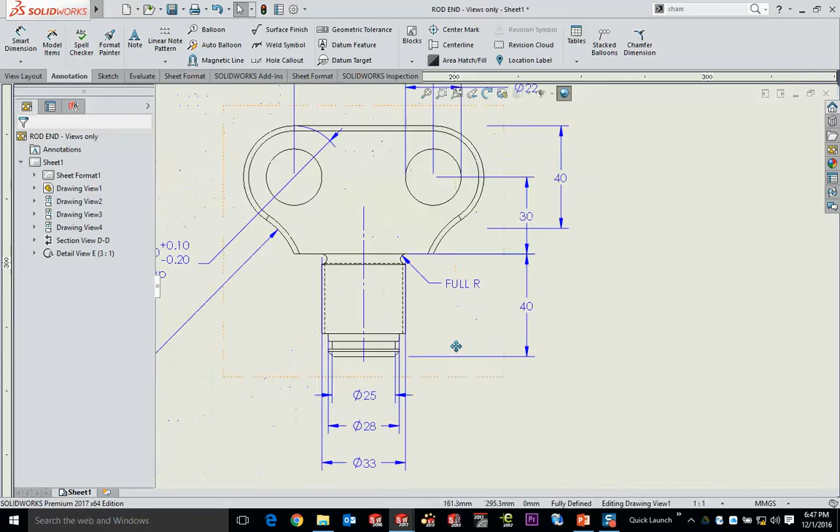The main thing I wanted to show here is that as I add additional dimensions, there's a behavior that takes place within the part and the drawing. So by adding a dimension after the fact, again, this doesn't drive the geometry, but if the part changes, this dimension will accurately update.

Say I put a dimension between this hole and the center line, for example. Now what happens on this, I think I've turned rapid dimensioning off. Let me do this again, sorry. Wanted to show you how this works. This is a setting that a lot of our users actually do turn off. I'm gonna go between a circle and a center line.

Now this widget pops up. I'm sure everybody has seen it. Most of you probably ignored that just like the other thing. But what it does is it does dimensional placement based on that same distance value. I am closer cursor-wise to the top of the view than I am to the bottom of the view. So what happens is it automatically defaults to that direction.

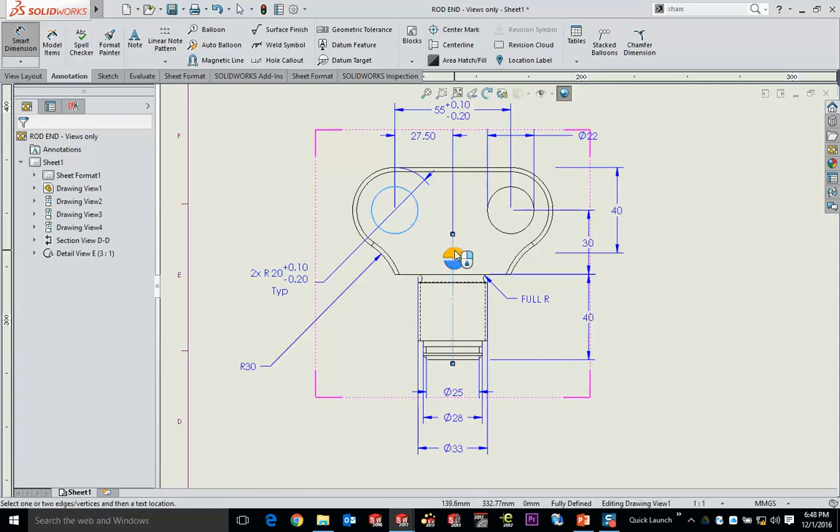But if I hover over the bottom half of that widget, you'll notice that it will push dimensions out of the way and auto-place and space that dimension below it. So this 55 up top, well, there's plenty of room up there because we had this 22 that was right there. But if I want to put it on the bottom, I could go ahead and move that one out. Now say I go ahead and put this one in place. Once again, it's going to go ahead and automatically nest those as necessary based on what happened to get selected. So it's a pretty interesting little process there.

Yes? I'm not turning anything on. It should be a default, but I'll show you where it's turned on and off here in just a sec. Yeah, so it'll be on by default, but I'll do it in this view here because obviously we just have the one dimension there. It's a little clear. It puts it to the top or it shoves this dimension out of the way to the bottom.

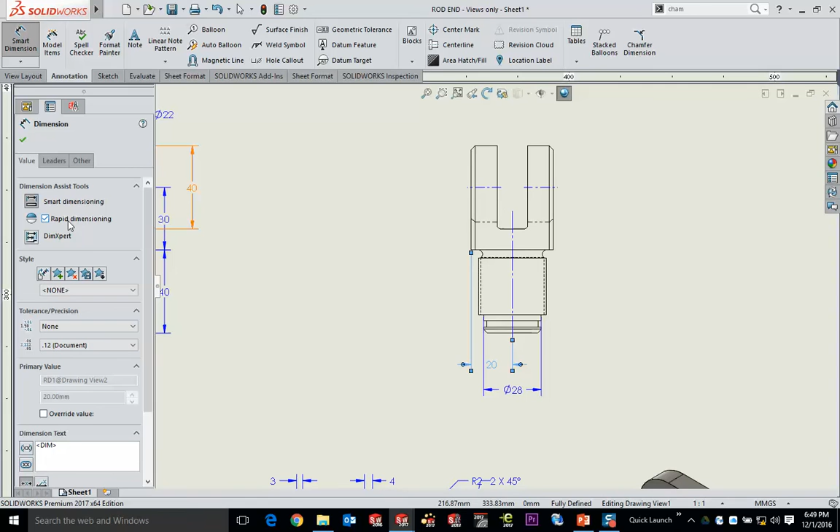But what does get a little different here is in a circumstance where we get into a circular feature. When I pick on an edge, now I get a quadrant instead of a line. And what it will do is it will find open space wherever it has to drop that dimension as I hover over those different quadrants. So again, it's a pretty quick placement. You can choose where it goes, and then you're basically done. So those are a couple of really cool power tools that allow us to get some of this data in there much, much quicker than before.

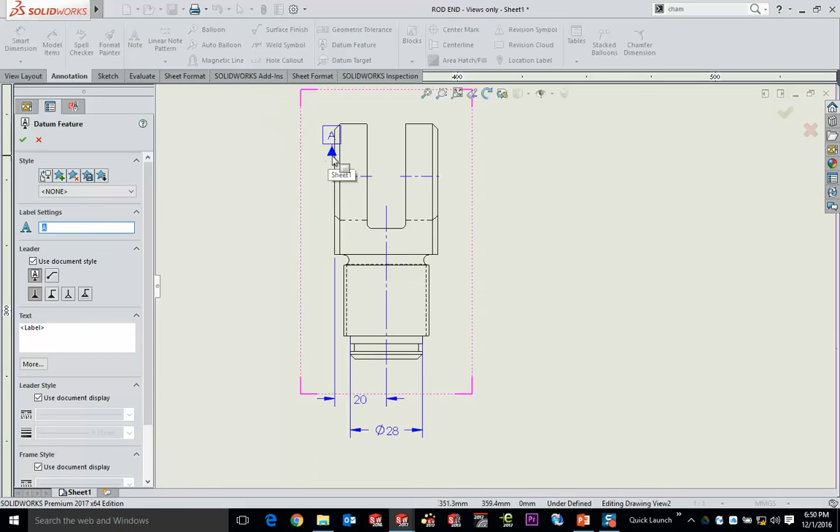Excuse me. Last thing I'll do on this one here is GD&T and datums. Now, you've really got to have a handle on GD&T in order to put these things on there properly. But there are full production level tools for absolutely everything that we do up here at the top. So if it happened to be a datum feature, for example, we go ahead and grab on a face. You can drop that datum on a face. You can drop that datum directly on a dimension if necessary, which if I grab it on a linear dimension, it's actually going to put it on that value. You can put it pretty much anywhere that you'd like.

Now by putting it on these additional faces, what I've now got are things that can be brought in or go to the part file depending on how we do those. But GD&T is the main part here, and that's going to be a feature control frame. So when you set up a feature control frame, it's really just about filling in the cells on this. You want to go ahead and grab the tolerance that you're looking for. So we'll do something like, let's just do parallelism. We'll do that between datums A, B, and C. Just type those in. That's pretty good.

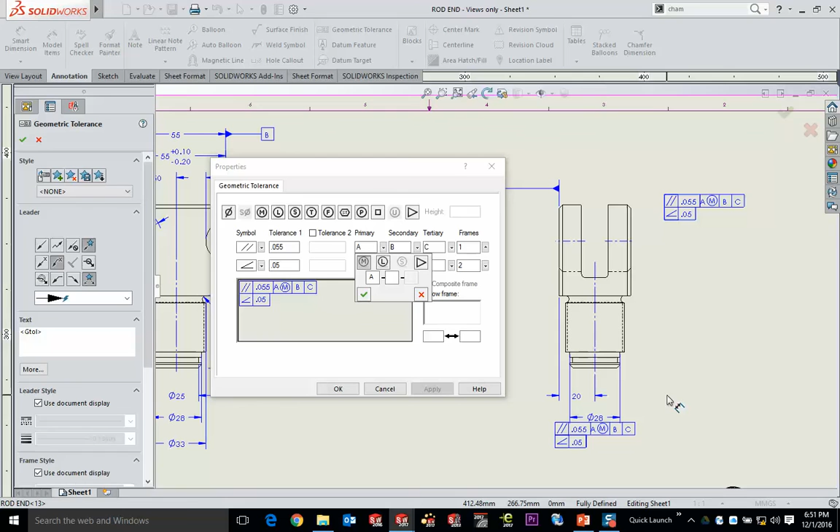And then you can even use things like maximum or least material condition, and then some other settings in there. But you're getting a preview of everything that takes place. Some of these aren't going to matter. I just wanted to put them in there for effect. That looks pretty good. 0.055. Good. Now, my cursor now has this very rich feature control frame out on the drawing. So I can go ahead and click to insert that if I want to. I can click to drop it directly on a dimension if I want to. And there's a little different behavior on each of those. This one out there is basically on its own.

You can add a leader to it or remove the leader depending on what you want to do. If you take that leader and drop it onto an edge, when you move it around, it will automatically snap in a direction perpendicular to that edge. So there's a lot of very clean behaviors there. It even puts the nice perfect gap in between, which is pretty crazy. See how that snaps that thing in.

But when it's on a dimension, it actually lives on the dimension. You can move it around on the dimension if you want to. Usually use the shift key to get that to move a little bit, or hold the shift key to pick and drag it off of the dimension, or reversing, shift key to pick and drag that onto the dimension. Oh, didn't work that way. Let's just drop it on there.

So there are many different ways that you can apply these feature control frames and then locate them around your 2D drawing.

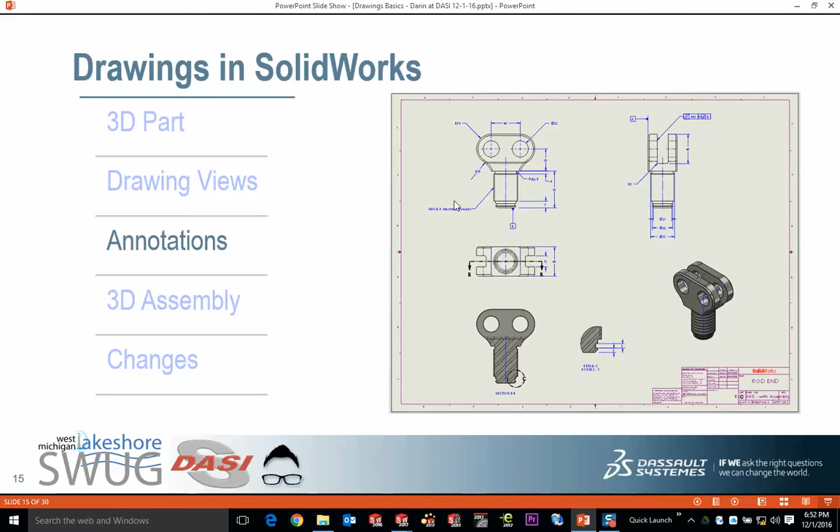All right, so we're going to move over, just keeping an eye on time there. We're probably going to go just a touch long on that, but that's okay. So let's go ahead and hit assemblies, because this is really a big part about everything that we do here.

It's not just detailing an individual part, but also putting the 3D assembly file onto the drawing. Now, the 3D assembly is something that is fully available to be placed on the same file as the views of this part. You can either separate it out into its own drawing if you'd like to.

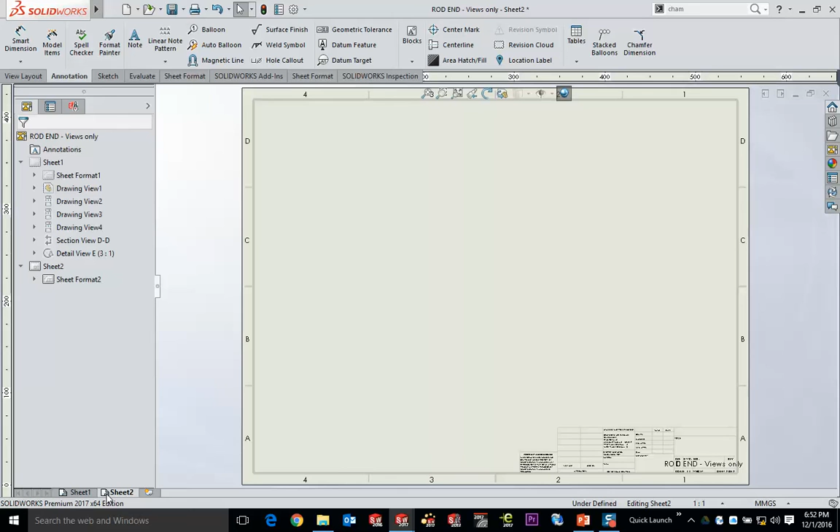Well, on sheet 2, what I want to do is go ahead and bring in a view of the assembly. There are a couple of different ways that you can do that, but I'm going to do a very deliberate way here. When you're sitting on the drawing and go up to your view layout, we have a button called Model View. I'm only using Model View right now because I have that file open in another window, and I can grab it pretty easily. Otherwise, you've got to browse for it, so you can either have it open now or open it through this command.

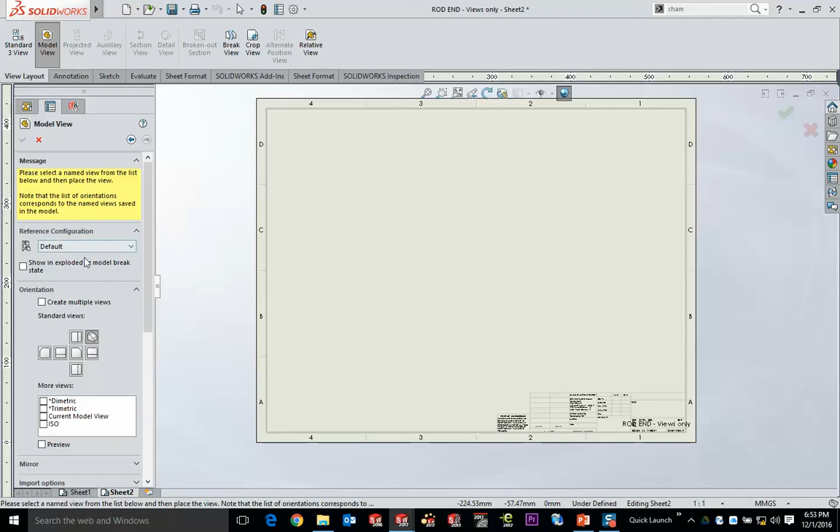But essentially what happens with this is you're now going to get this nice little view that we've got out here. I like to see what that view looks like, choose what kind of view that's going to be, and even the configuration that you're going to use for that particular view. So here we can go ahead and, on a second sheet, drop a view of the assembly.

Now, same thing here. I generally don't like to have a small looking view of this part or assembly. So you can either pick inside that view and change the scale of the view specifically, or come down here to the scale tool and change the scale of the entire sheet. This will make that happen quite quickly, and I think I'm keeping that one separate. Let's use sheet scale. All right, so that now moves up to being an appropriate size.

Now assemblies, I do a couple of different things. I typically like to show these as shaded, just because the colors will give you differentiation above and beyond things like just the hatching. But you also have the capability, once in an assembly, to display this in its exploded state, which is a setting right here at the top of the view palette if you're dealing with an assembly that has an exploded view. If it doesn't, for this configuration or for this view, that will simply be grayed out.

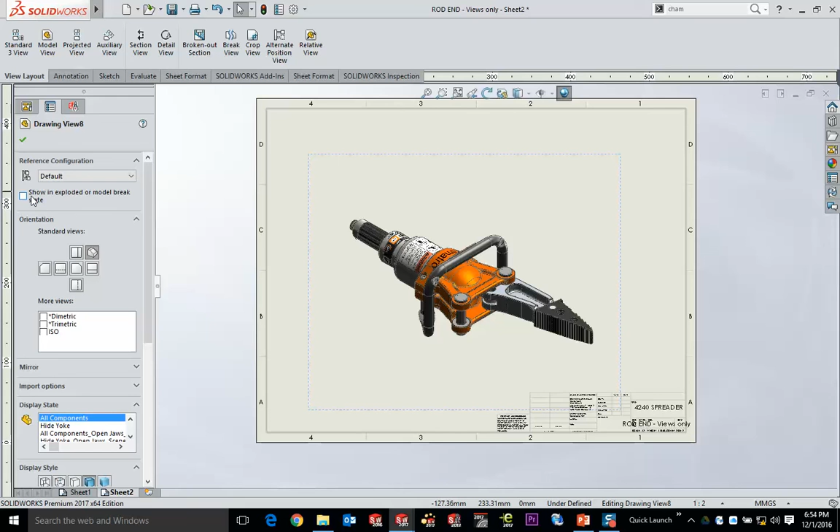But by showing this in the exploded state, this now gives us some capabilities here at the drawing level to be able to see this a little bit more easily, which we'll go ahead and zoom in a little bit on that.

Now whenever you have an assembly, this is the poster child for a bill of materials. By picking inside the view of the assembly and going to annotations, you'll see a pull-down menu for tables. There are different tables depending on the purpose. If it's a sheet metal part, you'll want a bend table or punch table. If it's a weldment, you'll want a weld cut list or weld table. But for a regular assembly of parts, we just want a quantity and a count.

So if you insert a bill of materials, you can select templates. Everything has the ability to be consistently set up for your process. We give you bill of materials templates, which are just column headings—typically a quantity, part number, description, maybe material, something else. All of those can be saved and tweaked for your purposes so the next time you don't have to do all the massaging I'm showing you.

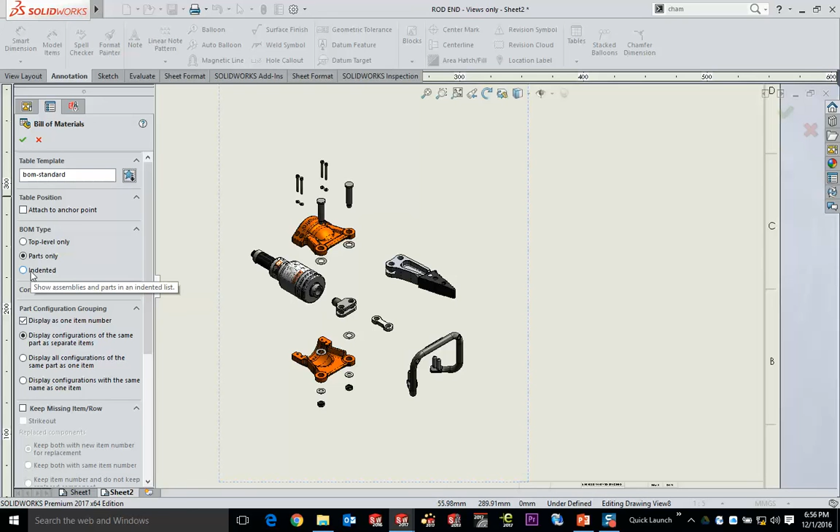I'm going to use one called BOM Standard, but if I hit browse, you'll see I've got ones for circuit boards, my costing application, weldments, pipe layouts. I use different templates because I want different columns for different purposes. In this case we'll use the standard bill of materials that comes with SolidWorks. You can show it with top-level files only, all parts regardless of subassembly structure, or as an indented list mimicking the feature tree. As parts only, it populates the entire bill of materials based on what columns of properties are there.

Now these bills are essentially Excel spreadsheets—SolidWorks homegrown ones, but they behave like spreadsheets. They'll snap into place automatically. As you're dragging it around, if I go near the edge of my border, you'll see it snaps right to the border. And if you go to the right, it'll snap right into that corner.

What's really awesome is that it takes properties, like file names and description—which is a property you can type in for pretty much anything—and those automatically populate. But the quantities are a count-up number. So from an accuracy standpoint, if you just have the files in the assembly, the bill takes care of itself.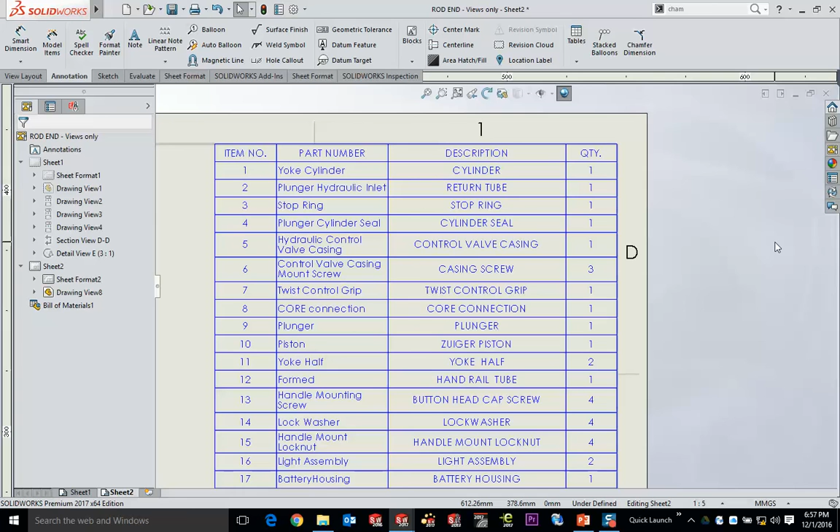Now, a customer I spoke to earlier today has a nifty way of putting in things they don't model, like lubricants, coatings, or adhesives. Those are things you don't put on your models generally, but they have part files with properties like vendor, cost, and coverage—a blank file they just drop into their assemblies. That way, on the bottom of your bill of materials, you'll see things like hydraulic lube or whatever it happens to be, because it's a part file full of properties that doesn't necessarily have geometry, but does represent something the bill has to be spec'd out for.

So those are really important things about this. I've got a bunch of 4s, a bunch of 2s in there—everything looks good.

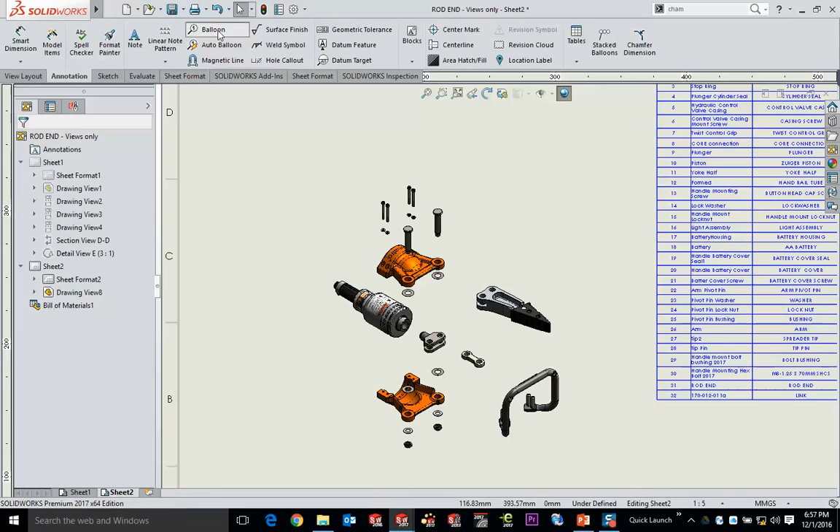Now ballooning is easy. You can grab the balloon tool off the annotations tab, and being very non-specific, just go ahead and start picking on a bunch of parts and adding the numbers. It doesn't matter which parts you click because this isn't a place where you can make a mistake—the numbers are indicative of what you've clicked.

So here we have a number 30. If I take the arrow and drag it over to another part, it's going to simply tell us what balloon it's now pointing to—it's really difficult to make an error in this case. Now, this is also not the best way to balloon.

What I would typically do is just pick the view itself and hit auto balloon. That way any part that's physically visible will get a balloon automatically. Auto balloon lays it out with magnetic lines, and if I start to change the scaling and size of this, you'll see that everything changes the size and scale automatically.

These can also be moved after the fact if you want to reposition them. My magnetic lines here allow me to reposition the balloons in mass. You can change their angles and spacings in mass, or I can simply pull it off of there and detach, and they're no longer part of the magnetic layout. But if you grab that magnetic line and start snapping balloons again, you're going to grab them up and they're going to be placed with automatic spacing on the bill.

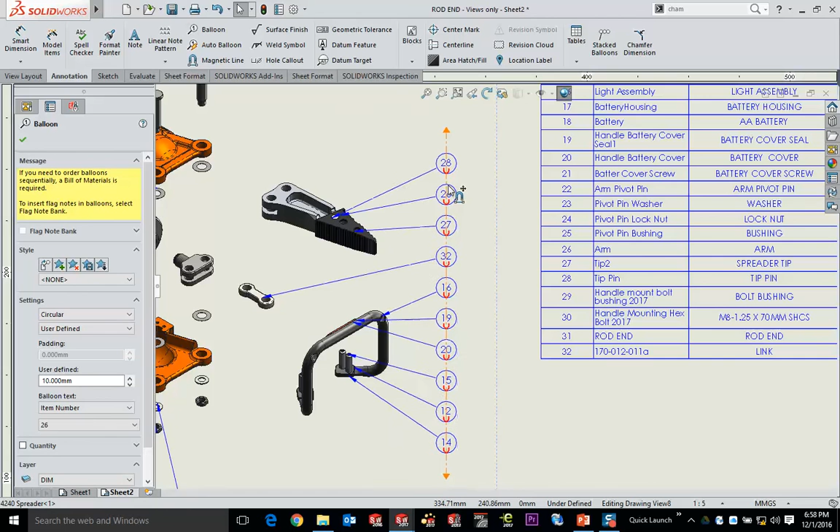Now a couple things that happen here as well is there is some talkback on this drawing. If you were to go ahead and select a part, you'll notice that that part highlights on the bill of materials. This again has been around for quite a few years, but it's just one of those things that not everybody typically looks at.

If you hover over your bill of materials, you'll see a way to move it by grabbing it. You don't need to grab that necessarily. If you just hold your Alt key down, you can pick and drag it from anywhere. But you'll also see 3 arrows that pop out.

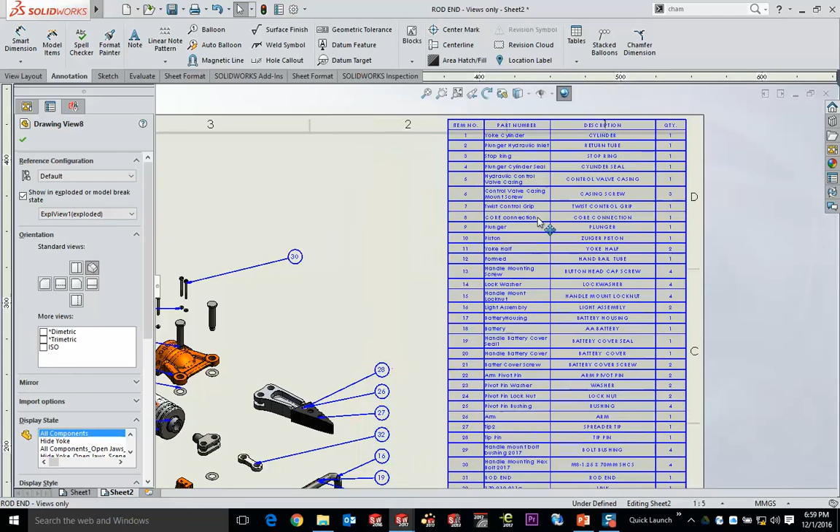If you go ahead and click those, this will indicate what parts have balloons and what parts do not. It's a very simple graphic there, but it tells you what you have yet to do and what might not be visible. The piston, the plunger, and the core connection are inside the assembly. They couldn't be seen, therefore they didn't get ballooned out. So there's a lot of little details that you're going to see from this location.

Now, associativity is a big deal for us. I got a bunch of 2s and 4s, like I said over here. If we go to this assembly and make a big change to something like this, say for example, I want to go ahead and add some stuff to it. So I'm going to grab a bunch of parts.

We'll do a little bit of mirroring here just to really quickly do this. And I'm going to mirror this entire assembly to create symmetry right around the center plane. So that's good. We got parts on the other side and everything is great. But what I've just done is I've also updated this file to show a different quantity.

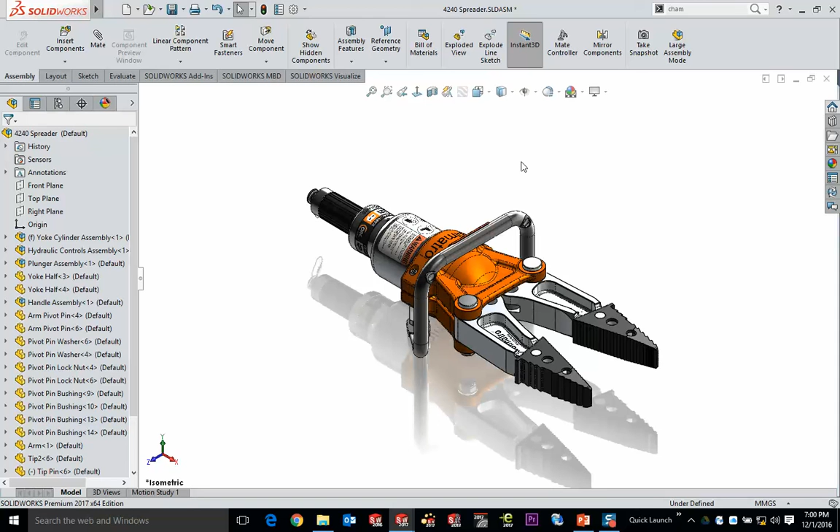The one thing I don't have updates to on something like this is the exploded view. And frankly, exploded views are pretty easy because all you really got to do is just start dragging things around in the assembly. So if you edit the explode, you can simply grab new parts, drag them around, and that will also update the exploded view that we've got.

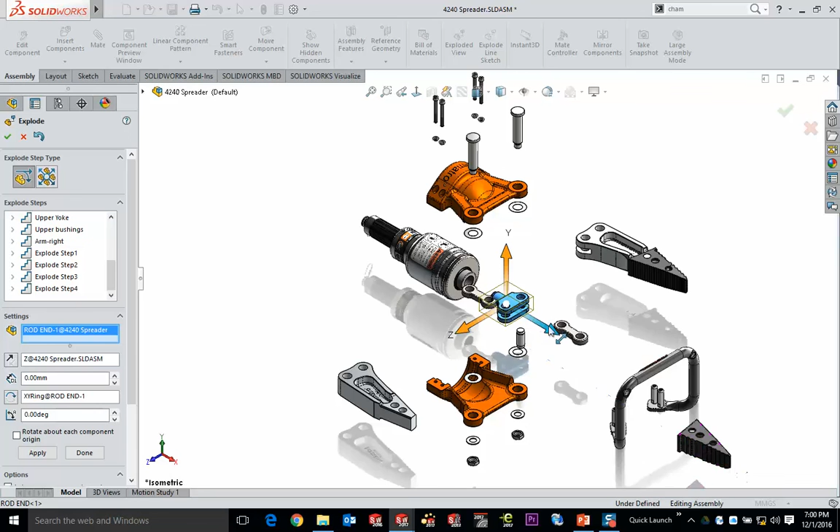I'm going to do this in a very ugly looking way, and you'll see exactly what the update looks like. So there's my exploded view updated, and we go back to the drawing and that will update there as well, so it'll be all right out in the front. So pretty cool stuff right there.

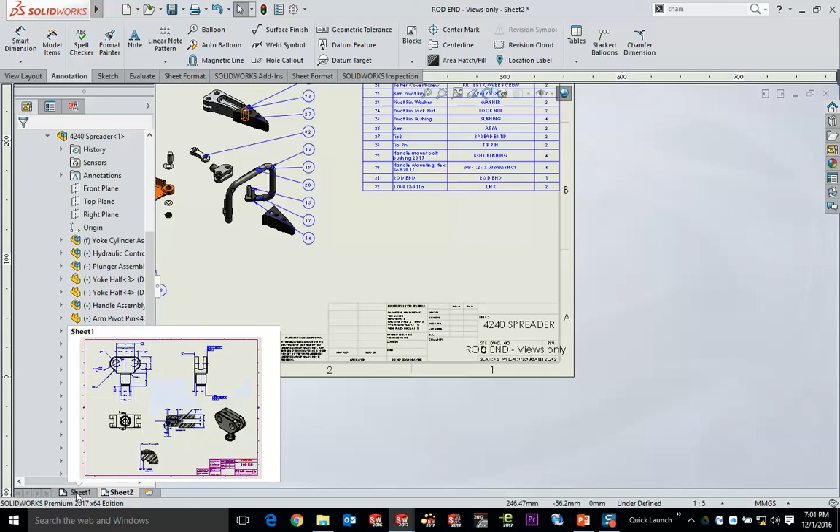This really just scratches the surface. But one of the things I want to show you down here on the bottom is the properties. You notice that says spreader on that one. This one says rod end. These properties are linked to the file itself.

He's going to shut us down here in just a second.

But properties-wise, one recommendation I want to give you: if you want to set up properties, make yourself a file that has all the properties you want in it. I've got one here that I call the properties seed file. You'll notice if I go to file and down to properties, what I've done is I've added things that I want to find or put in my title block—number, description, author, bill of materials, material, and so on.

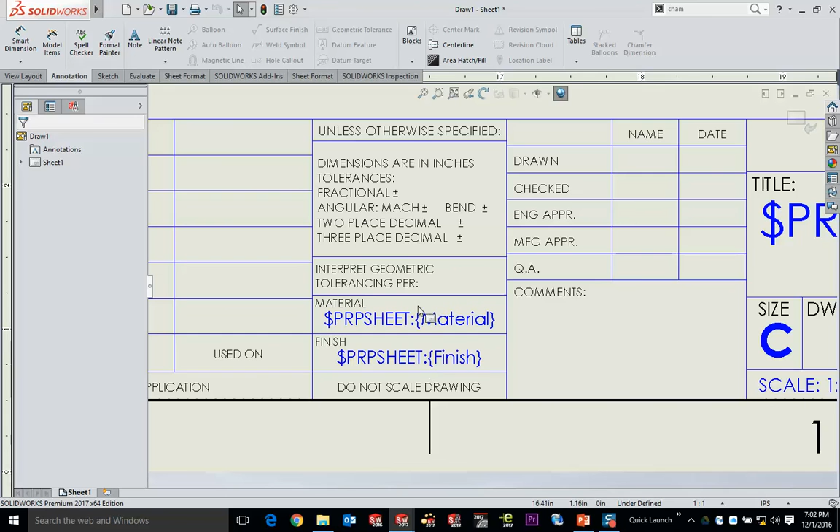The way to set up a template to have those properties in there, and again, I want to do this really quickly, is if I was to start a new file, say we'll go to a new SolidWorks drawing, and I'm going to use that same C-size template that I just started with. When you look down here in the corner, it looks virtually blank. But by right-clicking and going to Edit Sheet Format, you'll see some of the magical properties automatically show up. These are values that are going to populate based on what gets dropped in.

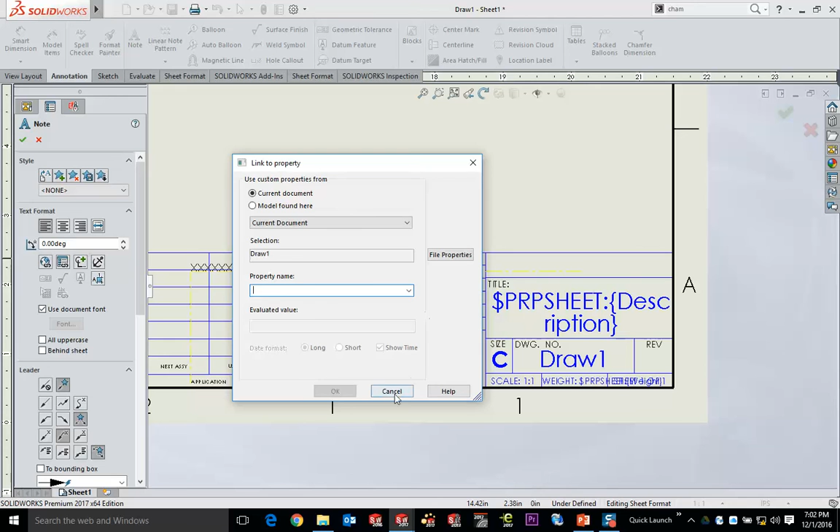So one of the things I'll generally do in a circumstance like this is I'll take my seed part and I'll just drop it onto the 2D drawing. By having that part now resident on this 2D drawing, now I can go ahead and edit sheet format, and then when I add a note and link it to the property, what I'm now going to have is a whole bunch of other properties available. Number, description, author, material, and so on. The goal here is to simply set this up to have these properties resident within this file. So by putting those in place, throw that in there, great. So now that's going to give me a property which is basically a description.

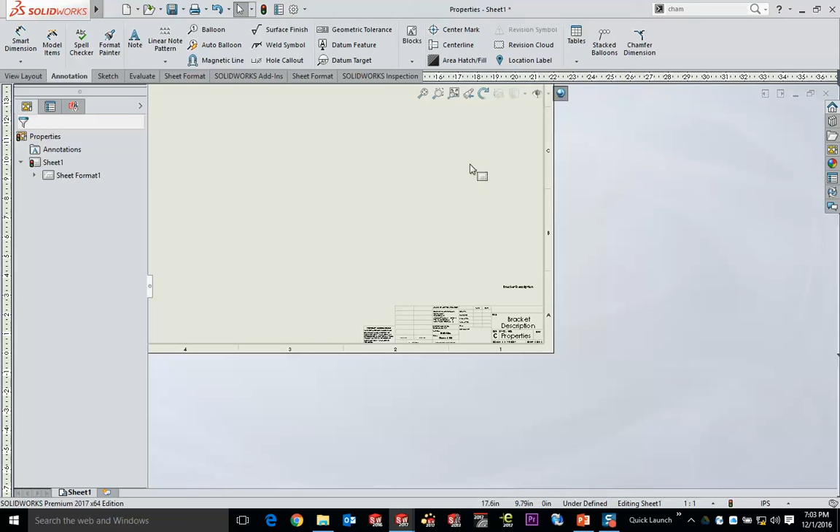When you set these things up, put them in place, get them where you want them, then delete the part off of the drawing, okay? What that'll then do is have a property that's no longer filled out, but if you look at the sheet format, you'll see that the description is still right there waiting to be used. That said, now you take your blank 2D drawing with all your properties set up right and do a File, Save As, or Save Sheet Format, but File, Save As, and save it as a drawing template. That way the next time I start, this one's called Properties right now, the next time I want to make a brand new 2D drawing, you're going to see one here called Properties, ready to rock.

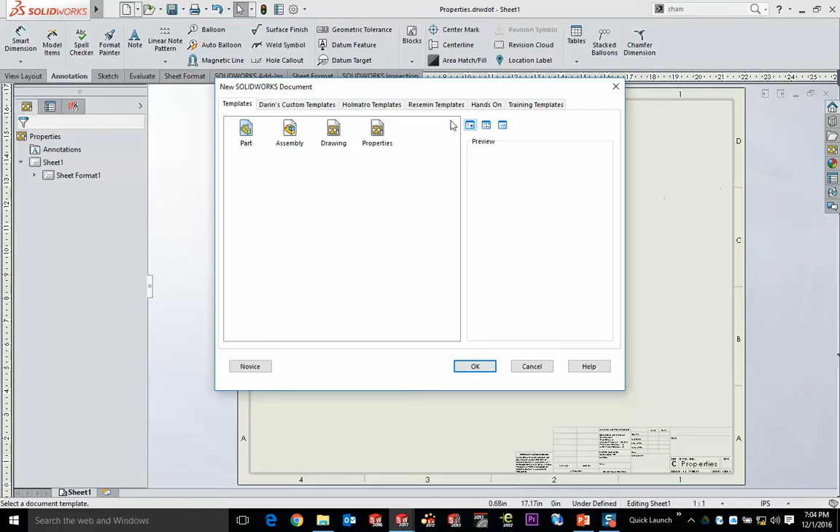So make a seed part. Doesn't have to even have geometry. Put all the properties in it and drop it on the drawing and then fill out all of your properties, because otherwise they won't be something you can latch onto a part file unless the part file is actually on the drawing to grab those. So sorry, that was a little bit rough at the end there, but I wanted to make sure you saw that one because that's a pretty essential one for creating these types of geometries.

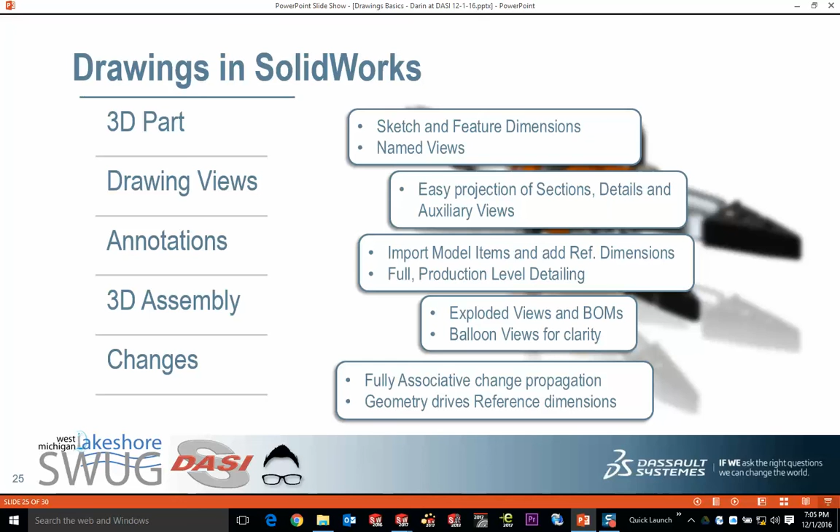Yeah, so pretty good. So again, all these processes, start with the drawing of the assembly, drop them onto your drawing, bring as much from the assembly or part as you can so you don't have to recreate the wheel, but add things where necessary. It's a pretty important part of that. But rest assured, if you change the part or change the assembly, the drawing will update. You just got to work with it, and everything's going to flow very nicely that way.